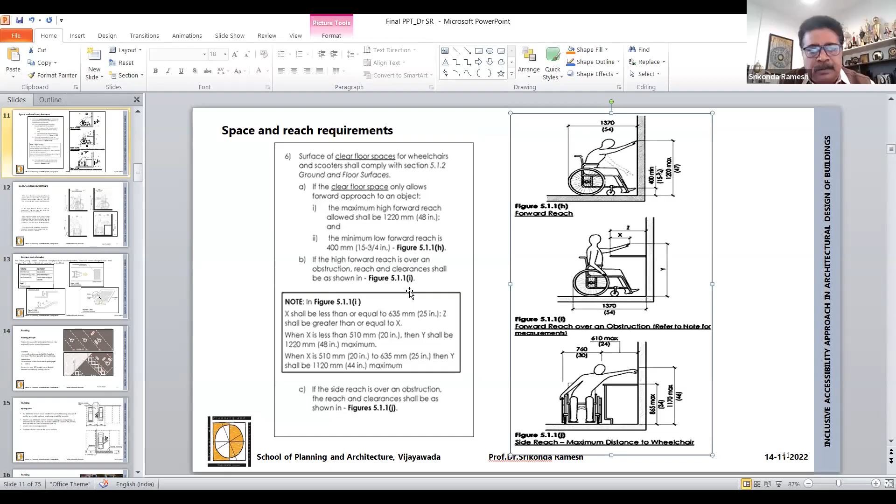Is it visible? Yes, sir.

Okay, good afternoon everyone. This is the first faculty development program organized by COA as well as SPA Vijayawada.

When you talk about architectural design, as you all know very well, since all participants must be architects, design is a discipline that focuses specifically on meeting the needs and demands of the user, creating functional living spaces, and aiming to combine technological and aesthetical parameters.

In the same way, it mixes as a creative process, and architecture is based on the creation and presentation of solutions at a technical level. By mixing both disciplines, architectural design seeks the value and formal qualities of the work through spatial experience.

This aspect of architectural design also involves other factors related to geometry, building physics, space evolution, ergonomics, and aesthetics, among so many other items, generally to get integrated into the design part. Therefore, the design is made up of many elements, processes, and phases.

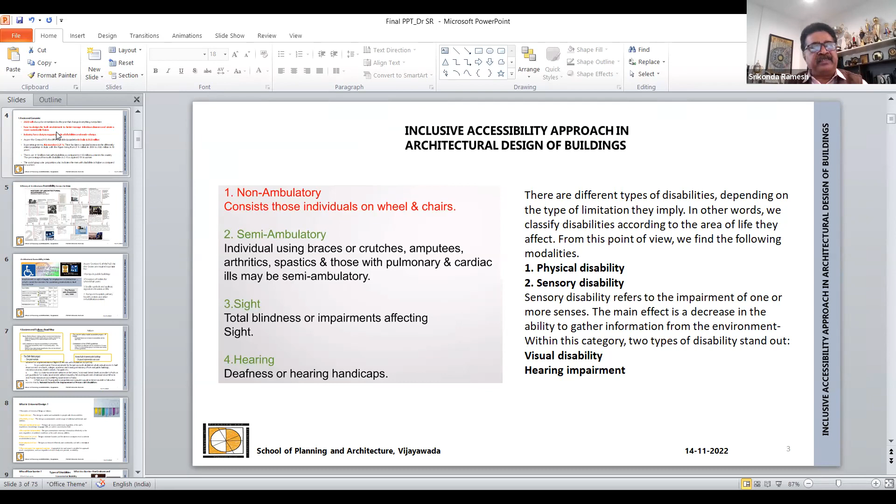Then sensory disability, what it means is the sensory disability refers to the impairment of one or more senses. The main effect is a decrease in the ability to gather information from the environment. This may be visual disability or hearing disability; these are two different things, the two difficulties they will be having.

Through sight, some percentage of information can be grabbed, but not fully. Sometimes partial visibility and full visibility they may not be having, so that kind of disability in terms of the visual generally will be having. Hearing also the same way - there may be partial and sometimes they may not be in a position to hear fully. These are the two things that come under this.

Then where it really matters to us - the non-ambulatory. This consists of those individuals on wheelchairs, and then semi-ambulatory individuals using walkers and crutches, and then cane users. All these are the semi-ambulatory.

From a sight point of view, there is total blindness and partial blindness where they may not be in a position to see. Hearing also sometimes has the same level of deafness or hearing handicaps. That's what we can say.

There are many ways disabilities can arise, but that is not the matter specifically for us. What exactly caused it is not the question here - there are people who are going along with us, and they are one among us. For such people, how can we bring about a universal design? That is the one which we have to look at.

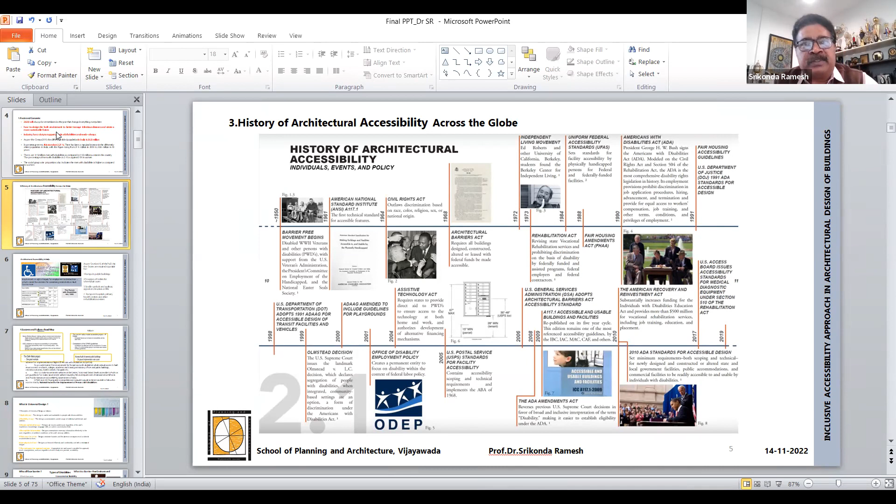Then it comes to the Indian government. The question arises: is there any Government of India initiative that exists for barrier-free design? Definitely, if you look at it, recognizing that persons with disability constitute valuable human resources for the country, and that a majority of such persons can lead a better quality of life if they are given equal opportunities - that's the first main item for any kind of act that we have.

The Persons with Disabilities Act of 1995 specifically indicates effective access to rehabilitation measures, particularly by the government, with a view to create an environment that provides such persons equal opportunities for protection of their rights and full participation in society. Accordingly, what they did was formulate and bring a national level policy.

That is the National Policy for Persons with Disabilities. The policy outlines specific measures and strategies, ensuring the protection of rights of PWDs, that is, physically challenged persons, to make them inclusive in society.

So those are the acts - there are a few more acts also. That is the Rights of Persons with Disabilities Act of 2016. Another one is the National Trust for the Welfare of Persons with Autism, Cerebral Palsy, Mental Retardation and Multiple Disabilities Act of 1999. And the Rehabilitation Council Act also, in 1992.

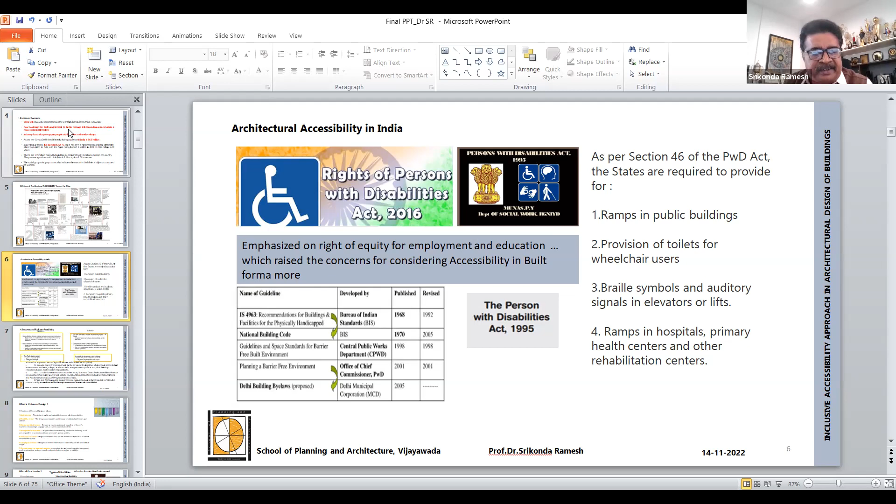So looking at successes and failures broadly, some successes include initiatives taken by different organizations. UGC and AICTE have also taken initiatives, publishing a book consisting of information on how we can incorporate these principles. Similarly, CPWD also made a comprehensive manual with guidelines for architects to follow those norms.

Other than that, national awards have also been given by the ministry. The ministry organizes this specifically to see how schools and hospitals will look into it, and they give national awards for the empowerment of persons with disabilities.

Every year on the International Day for Disabled Persons, 3rd December, the Department of Empowerment of Persons with Disabilities, Ministry of Social Justice and Empowerment, confers national awards for individuals, institutions, states, districts and other organizations for outstanding work done in the field, especially in the designing part, empowering persons with disabilities. Items which we're supposed to get integrated in barrier-free designs are also considered, and such great encouragement is given to them.

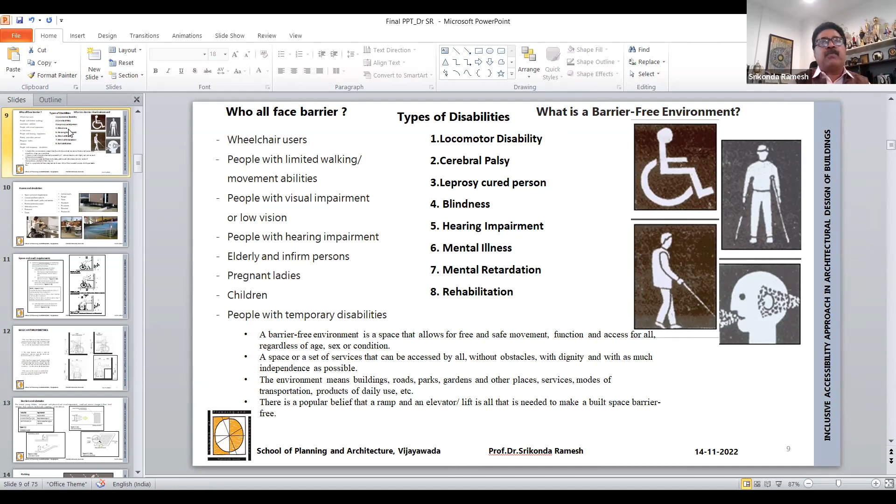An architect's responsibility is huge. First, you have to understand the challenges, whatever you are having. After understanding the challenges, you have to think about how the challenges can be addressed, whether for a normal person or a differently challenged one. For all of them, there is a challenge when it is placed to you.

It is not just about certain standards we are going to see now in this journey. Other than that, what is the best we can able to do? That's only the guideline to make it a minimum. What exactly is the maximum extent of the service we can provide, to make them more comfortable, give a more impressive environment, and bring in more inclusive kind of thought process and experience?

For instance, the particular items we are seeing are space and reach requirements, then ground and floor surfaces, accessible routes, paths and corridors, exterior pedestrian routes, vehicular access, entrances, doors, exterior routes, ramps, staircases, handrails, elevators, escalators—well, escalators not there, elevators—and then platforms, lifts, and all other items.

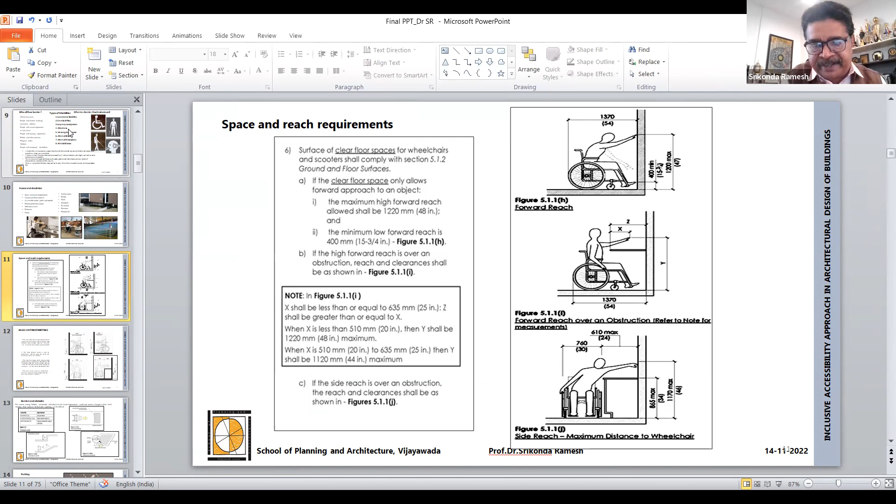So look at this: once you bend, once you move, these are the basic anthropometrics. Even height—generally we know very well the platform height we take is 750. Here it comes to 900 mm.

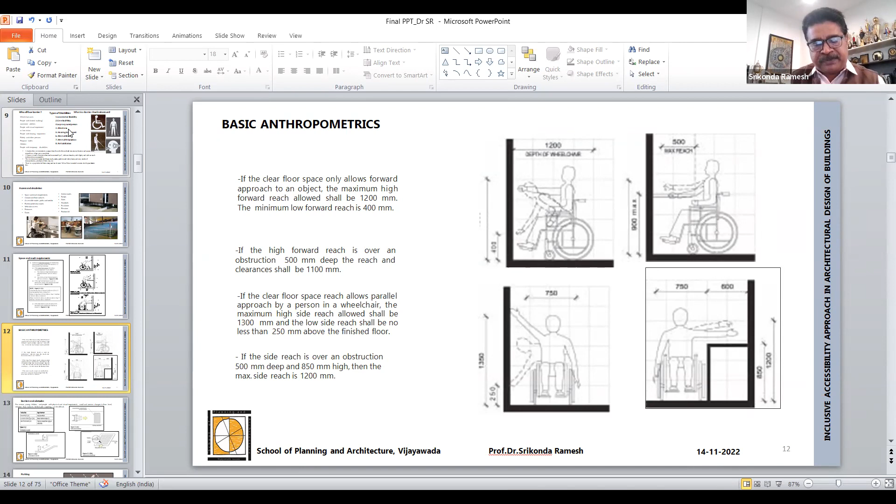That's what I am saying, the footrest generally will be like this everywhere. If you look at that footrest level, it's 250 and 150 level, away from the wheel, and there are some pedals where it will rest. Then high forward and overhead obstructions—we can see in what way you can avoid such obstructions and make the movement of the wheelchair proper.

We don't want to create a barrier with these sensitive and small items. If you really look at it, it can be designed more effectively for seniors, young children, and people with this kind of a challenge. Even the changeover spaces, like a slope, can be worked out appropriately.

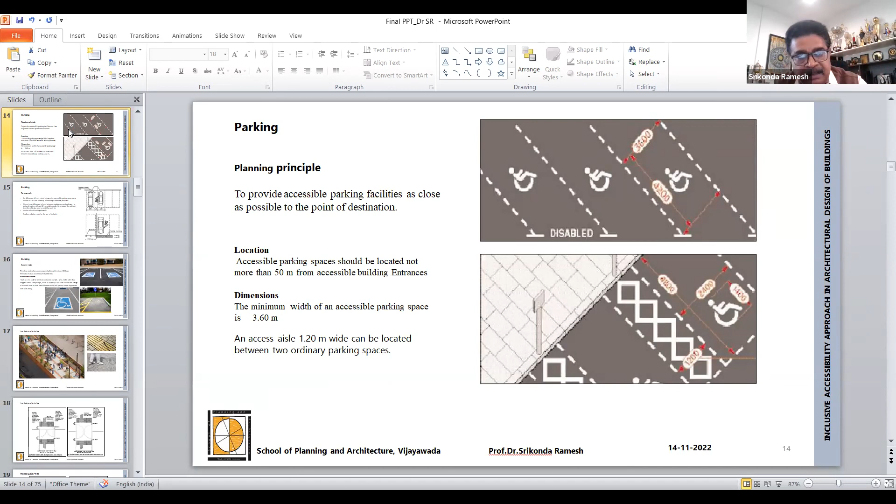First, you should be very close to the entrance lobby from where you get diverted to different spaces. Whenever you go for the parking, it's supposed to be 3,600. And parking lot to parking lot, once you take out the wheelchair area, you have to have 1,200. These are the minimum standards depending upon the ergonomics, anthropometrics, and the movement of the wheelchair being considered.

This also adds beauty to your entire design - the way you make the entire space accessible to everyone.

Then curb stones - once the door opens, once you keep a car parking bay, generally what we give is 2,500 to 5,000. But when you open the door for a wheelchair, one person wants to come and sit there, and another person has to assist - either motorized wheelchair, self-driven wheelchair, or person-assisted wheelchair. There are three different kinds of wheelchairs, and all three occupy the same space. From a space occupation point of view, it requires 1,200 minimum after opening the door.

Then you have to consider the same wheelchair doing a full turning - if it's a full 360 degree turning, you need 1,500. Otherwise, 1,200 is good enough. Then it can make a way to go to other spaces whatever you have designed.

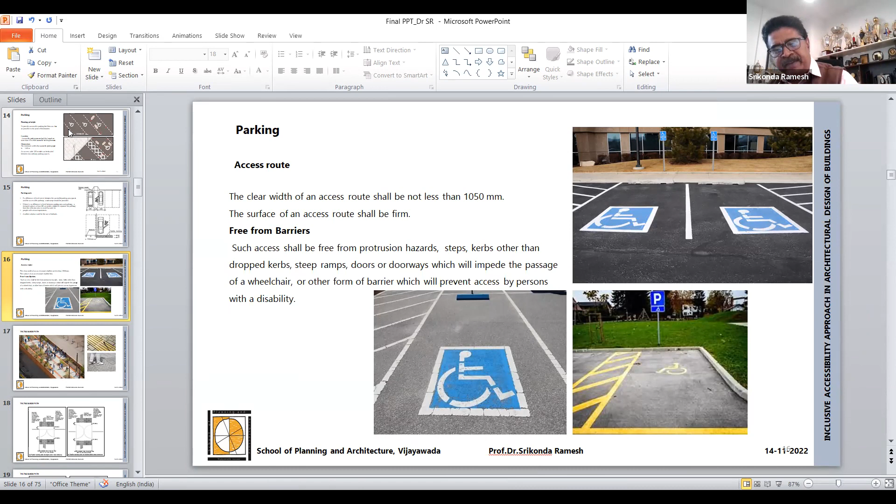So some symbols, access routes, free from barriers - I'll show certain examples and visuals so it gives you clarity, building on what we discussed in the earlier slides, in what way it can be done. The symbols make it clear this particular space is meant for that purpose, so you don't encroach or occupy or create a problem for free movement of wheelchairs or persons requiring that kind of access. So one way you can see these are the things which are tactiles, guided paths.

Tactiles - further slides can give you more details. One is the leading, direction tiles. Another one is the warning tiles. Another is the hazardous warning.

Depending upon the depth and width of the buttons, whatever we normally put on the surfaces where he is standing, you can see that's a different type of texture. There are two ways - when moving with the stick, if you put it down, he gets a different type of feel. That feeling is good enough - it gives a message to him. It's a place where he cannot go beyond that, or there may be a diversion of his path, or he has to stay back and move his stick again.

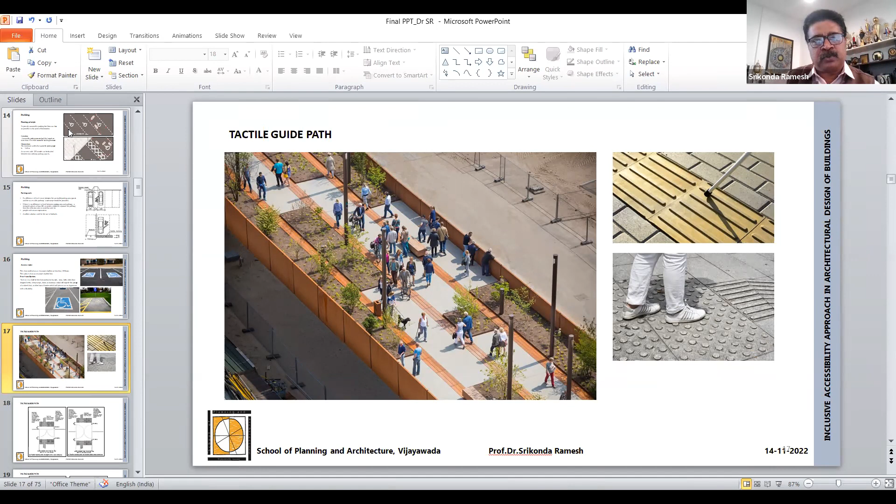So with direction tiles, the moment he touches it, he proceeds towards that particular direction. So you can see tactiles, the positioning of the tiles - one is direction, and the other gives information through the movement of button tiles.

That gives the space from where you will be in a position to enter. There you have got the door opening. So stay back and then you lead further, using direction tiles, the tiles which give the direction, because that way it's lengthier.

These recessed kind of surfaces, when I show the cross section, it will be much more clear to you. So whenever there are swing doors, normal doors, and movement and access from one place to another.

Even in public spaces, any kind of shopping mall, or even in a residential building, wherever you wanted to show the access, you can provide this in schools, hospitals, and all other places. These tactile tiles can really help visually impaired persons, guiding them where to go, where to stop, where to take a diversion, where to move, and which places are hazardous and not supposed to be entered.

These are the direction tiles. Depending upon the kind of texture and surfaces, even visually if they are not very strong, they have only short visibility. Color can also really help them understand, if they are partially disabled in terms of vision.

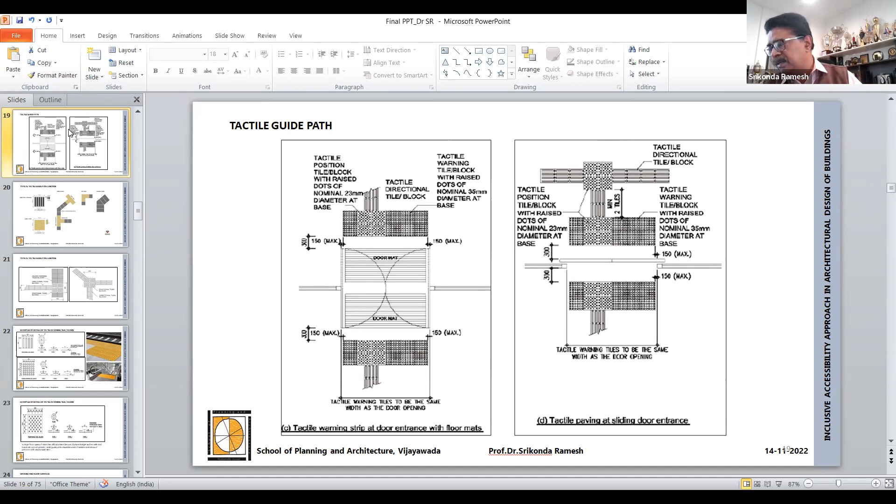So we can see these direction and advance tiles are the leading tiles, how they look. And there are stop or dangerous tiles, which give the signal to you to stay back, so that until you get the direction, until you touch or feel the direction tile, you are not in a position to proceed.

Such information can be passed, and this kind of design can be integrated into movement areas. You can see that hazardous tiles have a higher diameter, while normal dangerous tiles' diameter may not be as much. There are positioning tiles as well.

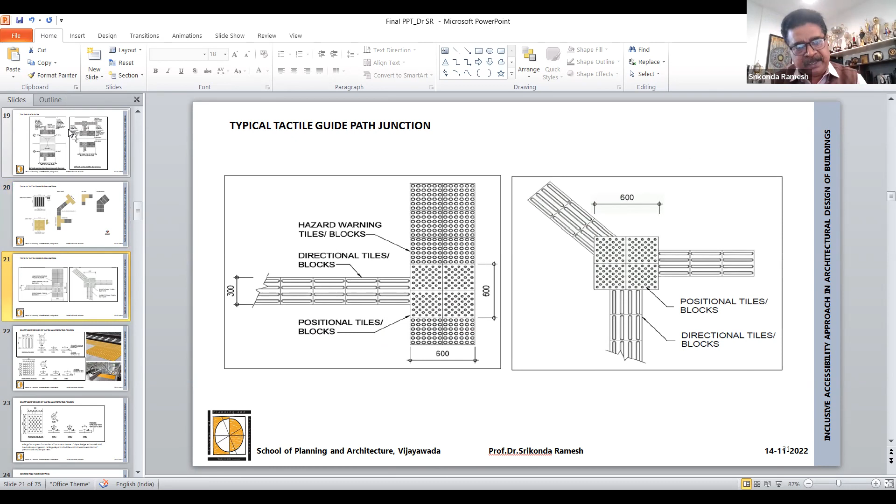This can be seen in a little more detail here, with a bit more clarity than in earlier slides. So you can see how the hazardous tiles, warning tiles, and direction tiles differ in dimensions and other aspects.

These are the things available in the market. Only if you can understand those tiles can you suggest the path and other design elements accordingly. The designing is our part, in what way it can be designed, angular, or direction oriented.

Or the places where you wanted to stop them, specifically where there are zebra crossings and footpaths close to the zebra crossing. There's a different type of hazardous warning tiles or block tiles we design there, or otherwise just next to it.

Even in the footpath, as you know, there are three different zones: one is the furniture zone, another is the actual movement zone, and the front side near the compound wall type zone. These divide the footpath.

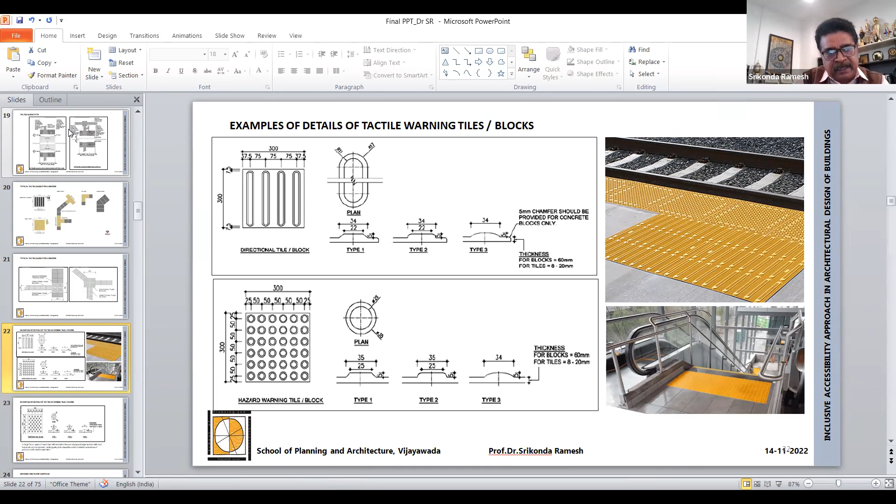Wherever there is a movement zone, this kind of tiles can be integrated, so that the movement gives very smooth access for them to reach their destinations with proper guiding and hazardous warning tiles, if done appropriately.

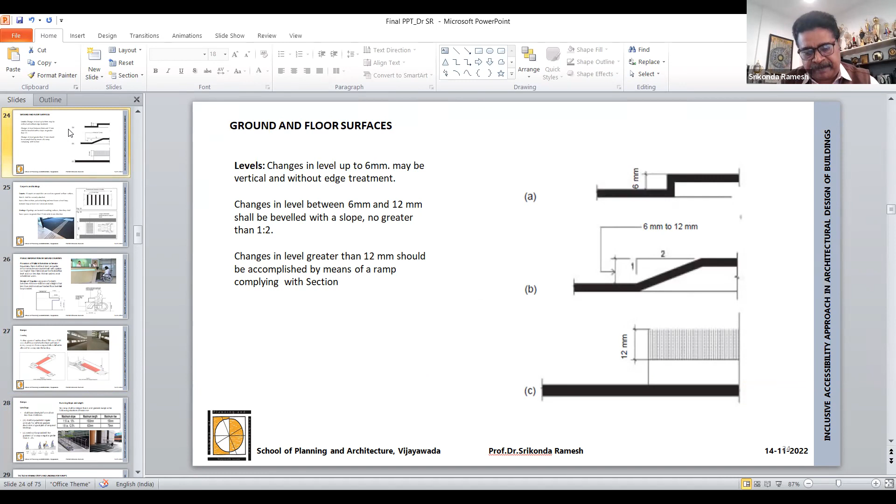Some more details, like positional tiles, where the diameter and spacing vary. The ground and floor surfaces, as I mentioned, only 6mm to 12mm can be adjusted or digested, provided you account for wheels, cane users, or semi-ambulatory and ambulatory persons.

You can see when using carpet, how the carpets and gratings can be integrated. Even the carpet should be at the same level, so that it maintains a universal standard.

There should be a language. This is a language, and if we have it, people can easily understand it. But this language, only in how you put it, can take them and lead them to spaces as others are really using and experiencing. To that extent, to the maximum extent, we can achieve this by integrating the same thing in proper design.

I got only a few minutes, so I'll try to make you understand overall about this - in what way wheelchairs work in case of a reception or information counter, the design, the desk where they can operate and write and collect information.

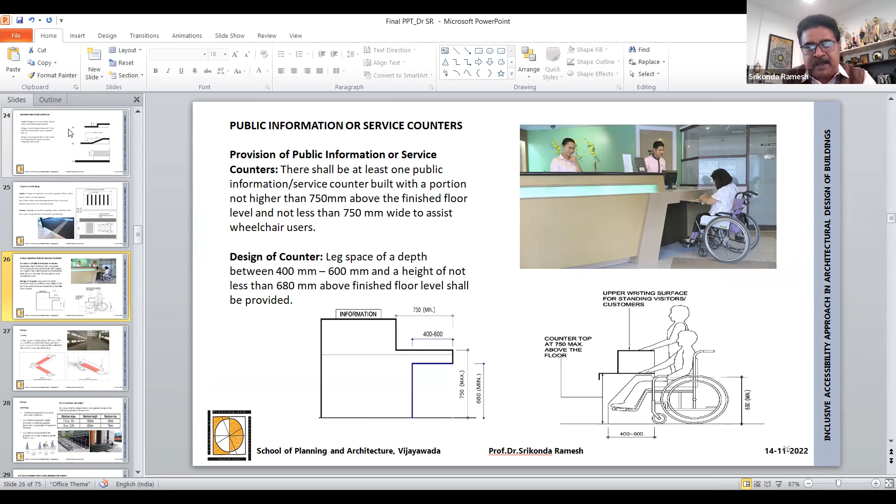It's supposed to be like 750, and the bottom level not less than 680, so that even including his knees, without any problem, it can go inside. They can sit comfortably and operate this kind of furniture design when it comes to the interiors.

For ramps, you should remember 1,500 is the minimum. It should not be less than that. You even have to introduce railings at 900 level, where cane users can make use of it.

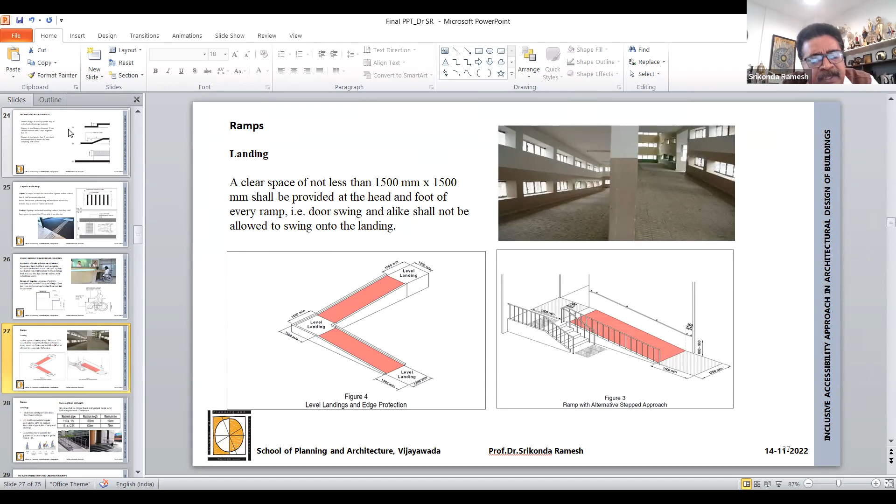There are different slopes, starting from 1:10, 1:12, 1:16, even 1:20. All these things matter to us.

The maximum slope 1:10 means, if you say 150 mm height, it will be 1500 mm length. Similarly, if it's 1:8, that's 12.5% slope - if 75 mm is the maximum height, it can go for a length of 600 mm. These standards have been converted and shown lengthwise, how the length is supposed to be in terms of its height.

Easily you can see what 1:12 gradient means - this is how we work it out. In most ramps, they can be integrated with tactile warning strips, as well as landings, where you'll be in a position to allow wheelchairs to go comfortably without obstructions and not exceed the speed limit.

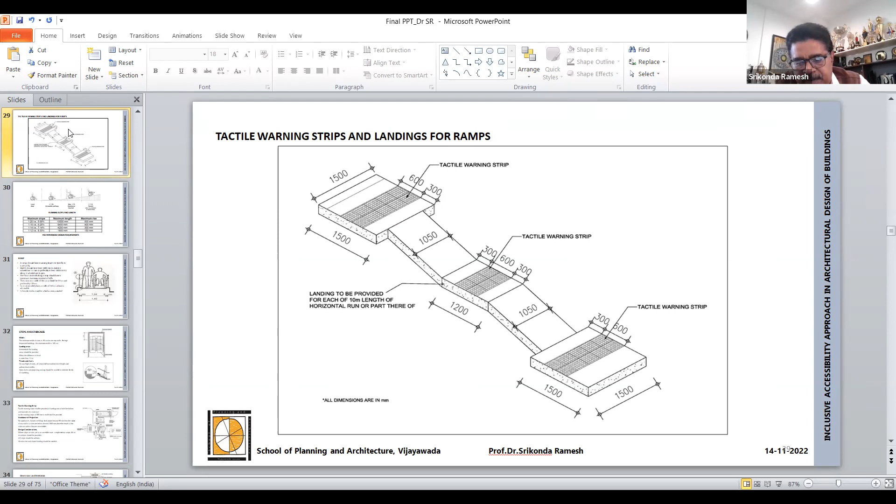The maximum length 1:20 - generally 1:20 or 1:16 is ideal. In hospitals also, we see maximum of 1:16, but not 1:12 or 1:14. Mostly what we see is 6,400 length, with only 400 as the rise.

This way we can see the ideal level, accessible pathway, assistance required, and hazardous crossing points. So an accessible pathway at 1:20 is more accessible, but maximum assistance is required if you go up to the maximum of 1:10 ratio. Less than 1:10 is not at all advisable.

These standards are available, but to make you understand, sometimes you yourself can design taking certain things into consideration. What the architect requires is the information, the data, and the innovation that has been made. If you gather all these items and have them in your mind, you'll easily be able to put them into your design and see how the design works.

Because you are the visionary, you are going to design any campus, office building, residence, or any kind of commercial space - different types of people are going to use it. Irrespective of limitations, it should be accessible, it should be workable to everyone.

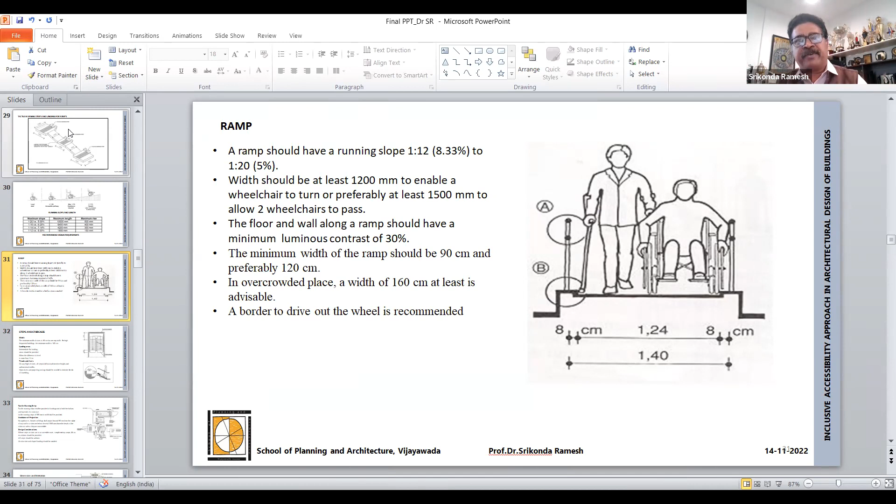For architects, you have to give a minimum of 1500mm, irrespective of the occupancy and the kind of load you are designing for, whether it is a double loaded corridor or single loaded corridor. But for a proper double loaded corridor, it could be 2400, depending upon the occupancy. Once you want to provide a barrier-free environment and make it comfortable for wheelchair and cane users, you must maintain a minimum of 1500.

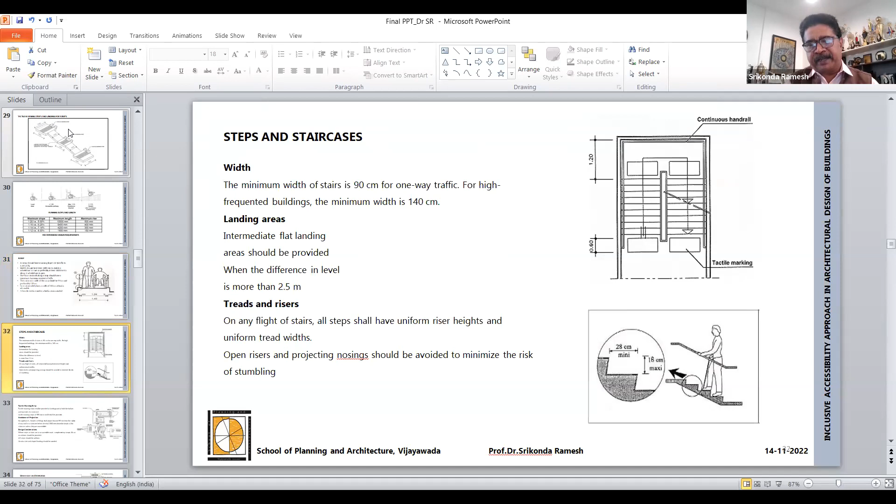At places where there is a turning point or starting point, you need warning tiles, like the button tactiles we showed, which give a warning so they can understand something - either a diversion in the route, an obstruction, a mid-landing, or a landing. There's an immediate change, so you have to be careful. That's the signal it gives them.

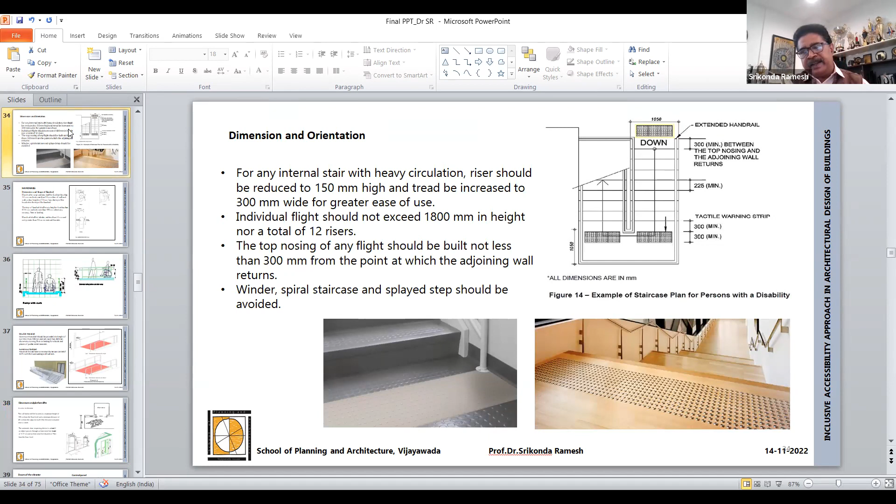See how it looks - before steps, this is how it has to be given, so that they can lead to the corner and hold on, even with partial visibility. They can hold the railing and move towards the direction of their work. Of course, you can see handrails of a different nature.

This is much better to use - you can embed it in the wall or make it a straight running rail. The maximum clearance from the wall should be 50mm. It should be fixed, and 30 to 50 is good enough, but 50 is always better.

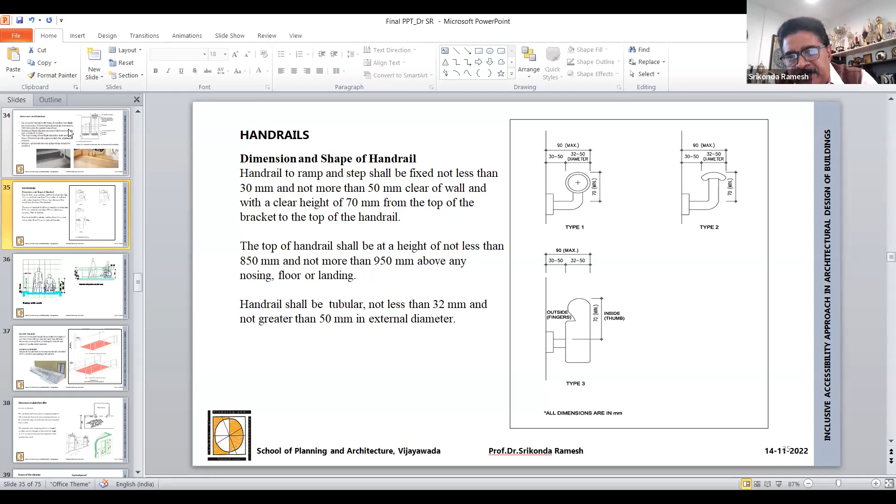For slopes with a person walking, you can see the height of the railing can go up to 2 feet 6 inches or 30 inches, that is 750mm. Some places use other rail heights - 750 is for children, and 900 is even for elders to make use of it.

Where there are steps on one side, you can introduce railings on ramps on the other side in such a way that all persons can be accessible through this design.

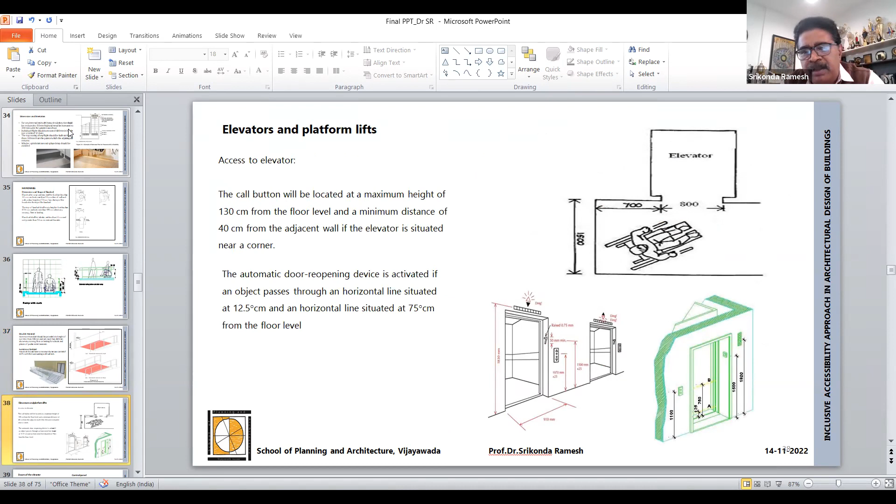Elevators and platforms also give the same accessible feeling. A minimum of 800mm is the width required for the elevator so that a wheelchair can move in with ease. You can see in the plan how the doors of the elevator are supposed to be - minimum or more than 800 is better.

The control positions should be accessible to the hand of a person sitting, so the length you have to fix from the finished floor level to the usable level is up to 900mm.

Doors of this nature are always better. Here you can see how the doors are supposed to get opened, and once open, the bottom floor clearance has also been mentioned very critically.

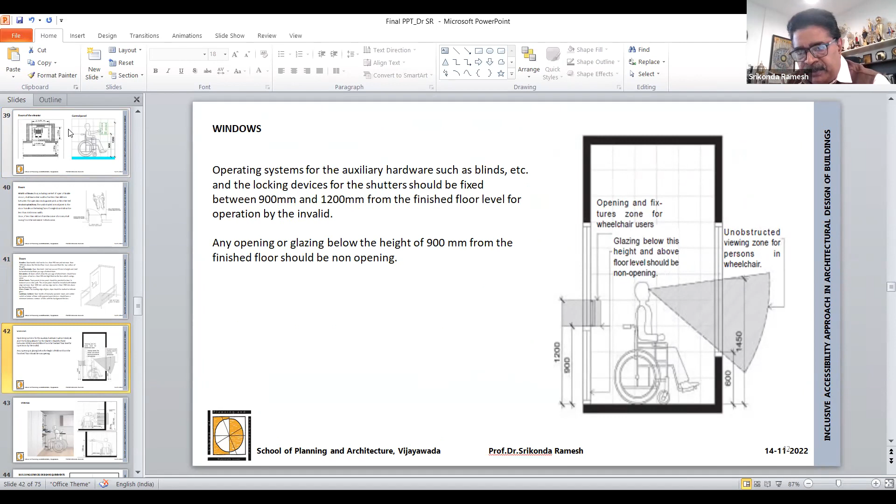For window openings, 1200, 900 - you can see the openings and fixtures specifically for wheelchair users, showing how it's supposed to be.

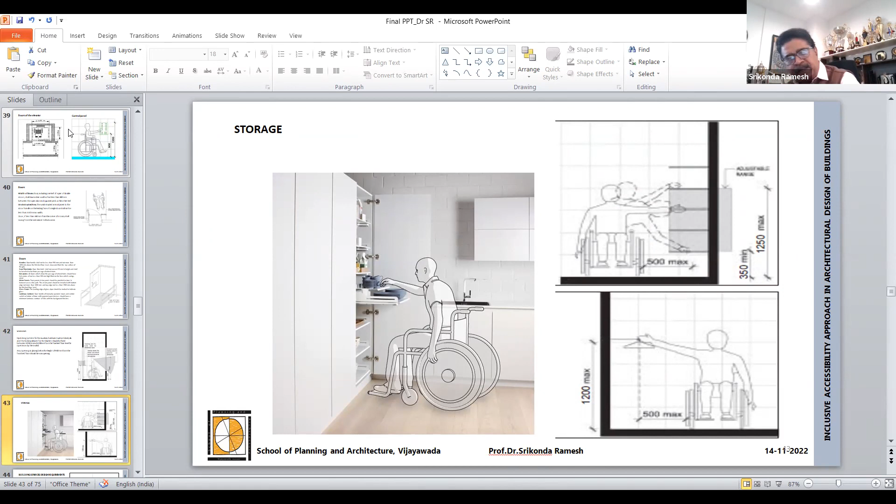For storage, once there's a storage unit, leg movement or leg room may not be available. If you provide a recessed leg room, this isn't a problem. If you're not able to provide recessed leg room, you need pull-out systems so that the legs can go in and the hand can spread, making items accessible to the person.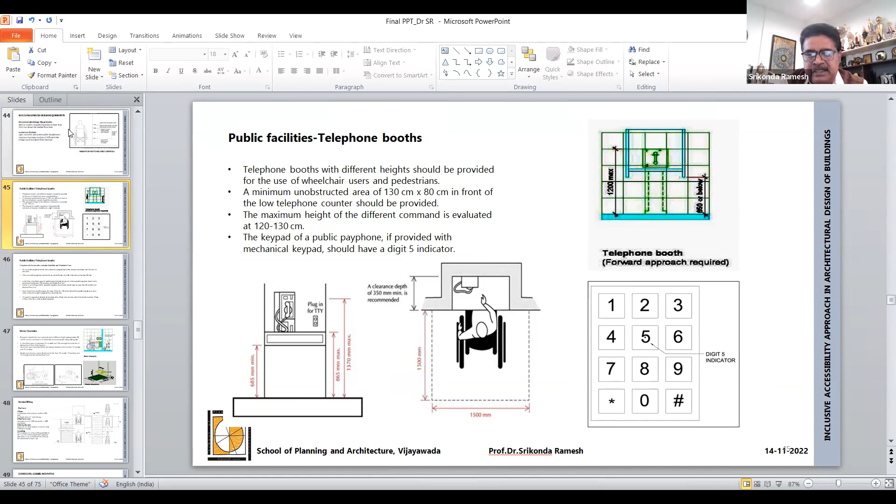Public facilities and telephone booths should essentially be designed like this, and should not make the person stick out from the particular obstruction. So with recessed items, there is a particular dimension of 350 mm, which if maintained, allows a person to easily press the buttons and access public telephones without difficulty.

Now this is one important thing regarding wash basins, and then there is the leg room, which is very much important. Legs cannot go inside. If it goes inside, this is how it's supposed to be. It should not get stuck and obstruct general movement.

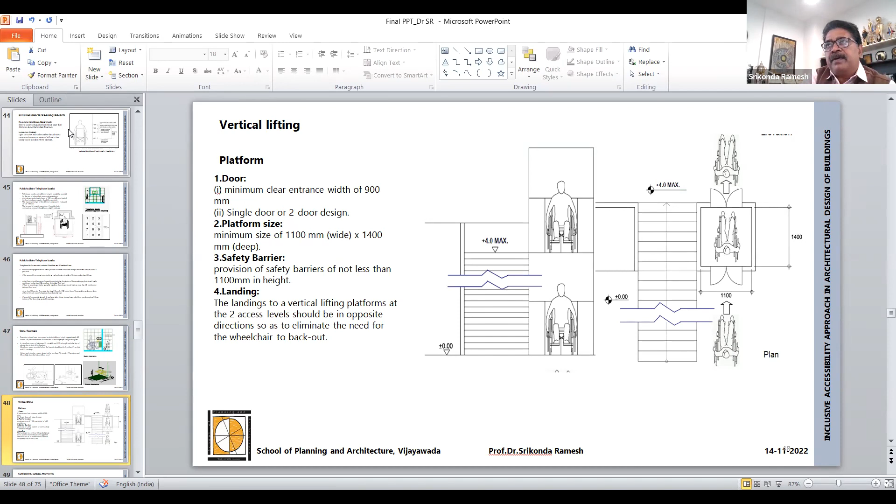Platforms, doors, sizes, safety barriers, and landings, if you see. Broadly, I'm showing you certain things that are there in the standards, as in CPWD standards, AICTE standards for universities and colleges, National Building Code standards, and the Universal Building Code also. There too we have the standard. Go through it, and some items I am showing you, depending upon conditions and situations, can be accordingly integrated into your overall design.

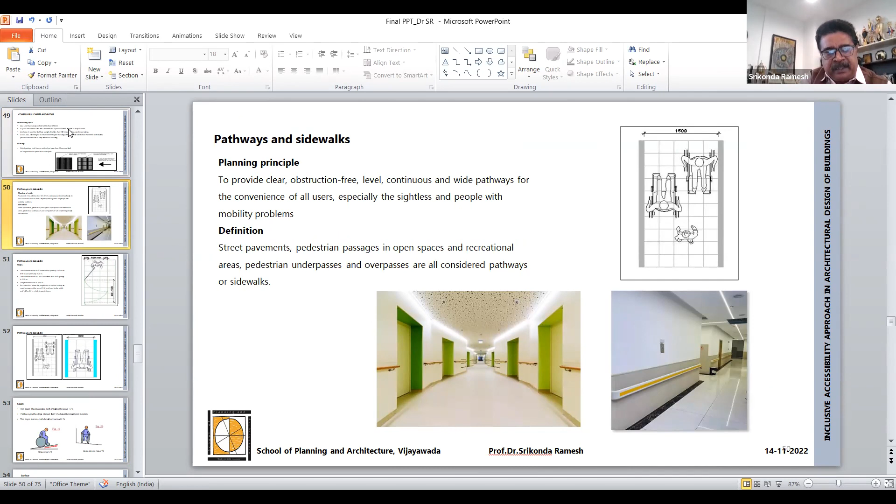So pathways, sidewalks, and all the things related to color, texture, including guiding lines, everything can help a person reach wherever they want, where you really take the design and integrate it into the overall design. That's what matters.

So the general movement of his stick gives a lot of information so that he can assess and access different areas - the diameter and length of the stick, and how the pathway should be, preferably 1200 mm.

The minimum width for two-way wheelchair traffic passages, as I said, is 1500 mm. The preferable width is 1800 mm, which is best if you can go for it. So you can see how 1500 mm allows two wheelchairs to cross each other.

What is the appropriate slope? 5% slope and 2% slope. A slope of this nature is always dangerous. The slope across the path should not exceed 2%. Otherwise, it is very dangerous and creates more discomfort.

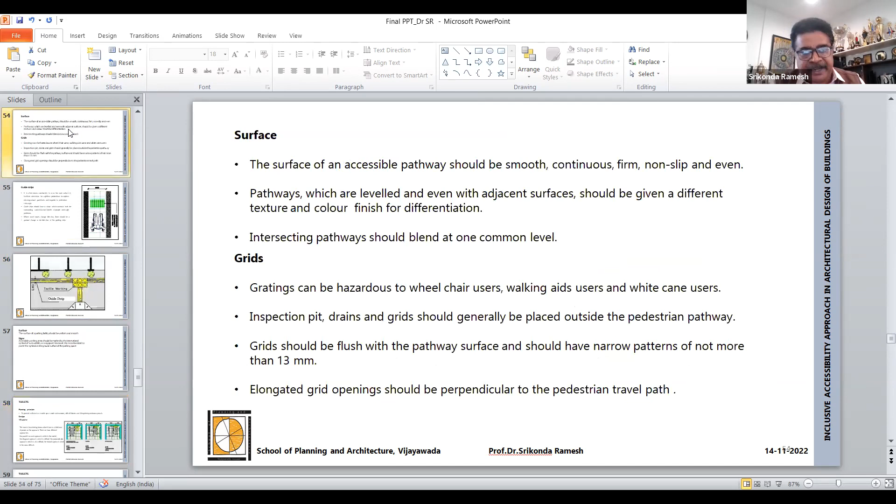So in case of footpaths, wherever you want to have zebra crossings, you will use button tiles, tactile marking, and guiding strips. It stops there when the footpath level is 150 and the normal road level is plus or minus 0. You work out the slope where it joins the road level, then you have to use hazardous tiles and danger tiles, where they can stop and negotiate which way they have to go.

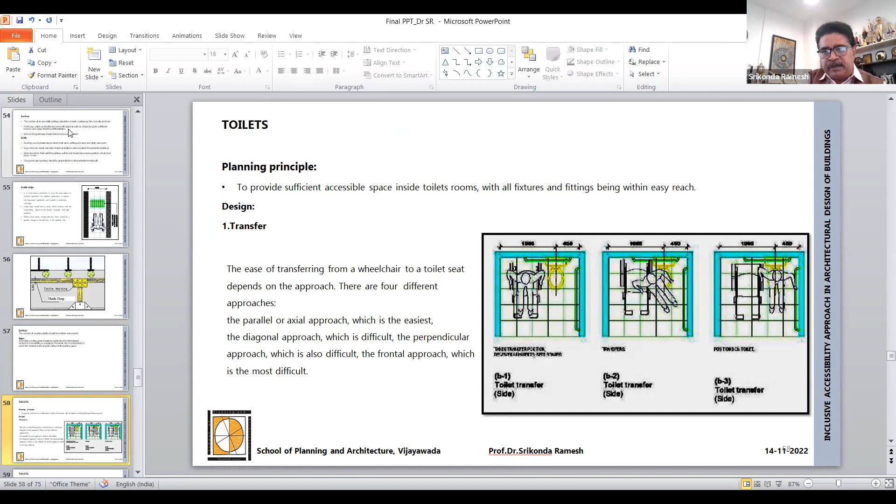Toilets are one important thing, a prime requirement in all places. When the wheelchair user shifts to the WC, one can think through this, and accordingly the width has to be worked out. You can see in case of a wash basin, the movement becomes tough. If it is 1500 mm diameter, for a full length turn, D comes to 1.5 meters. If there's another element like a wash basin present, then it cannot work.

In case a wash basin is provided properly, there should not be a bottom trap obstructing it - the drain pipe should go straight, concealed within the wall, so the wash basin doesn't create a problem. If there is a bottom trap that hits the legs, then the 1500 mm diameter cannot properly allow a full round turn in the toilet.

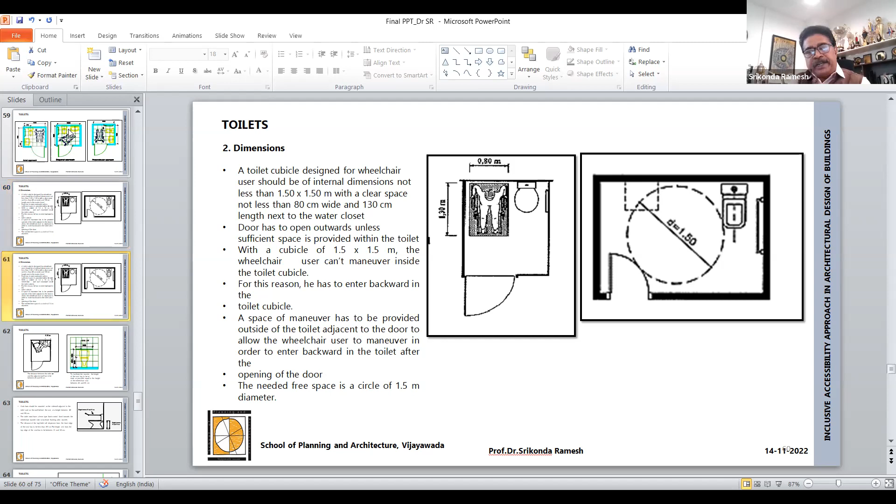See how the shift works - I've already shown this to you, but I'm showing it a second time since it's important. Only considering the WC, this is how the dimensions can be seen - 1300, and the height of the handrail, because he has to hold the handrail either at the back side or the side. Then he can shift from the wheelchair to the WC. These are very important things that should be taken care of.

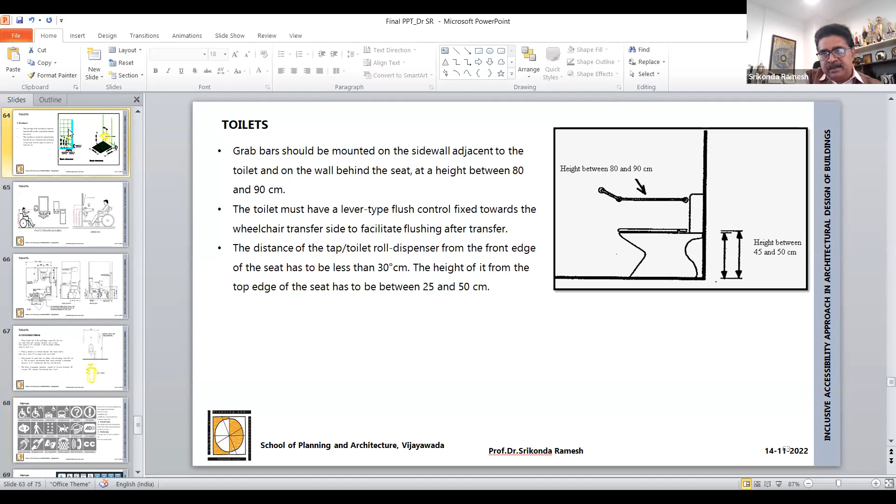Otherwise, the design you have made is not going to be useful to them. Side rails for the toilets where they can hold, and for the wash basin, the angles we fix, and the bottom trap, in what way you have to design it. You have to be very critical while designing, thinking in what way this should not obstruct us. You can see what I am showing you, the bottom trap.

Sometimes, straight from the top, even without the P trap, you can take a straight trap. The mirror also should be inclined - it may be more preferable. If it is straight, some ceiling or certain things may get reflected. If there is a slight angle towards his face side, normal to the line of visual axis, it may give full clarity about the mirror to him.

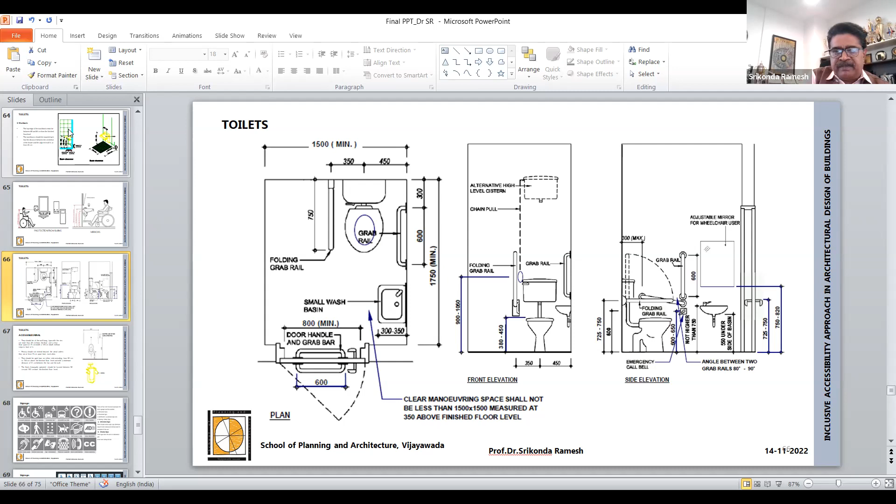All things put together, you can see the railing of the door, the handrail, and then internal items, all items. Even here it has been given the cistern tank and everything - it's a very old design. Nowadays there are flushing tanks, and wall-mounted things are coming too. That's more preferable than floor mounted.

There are certain symbols - these are urinals where cane users and other users can be made more effective, so you can see the side rails where they can leave the canes and hold it. Even they can use these kinds of urinals in a proper way.

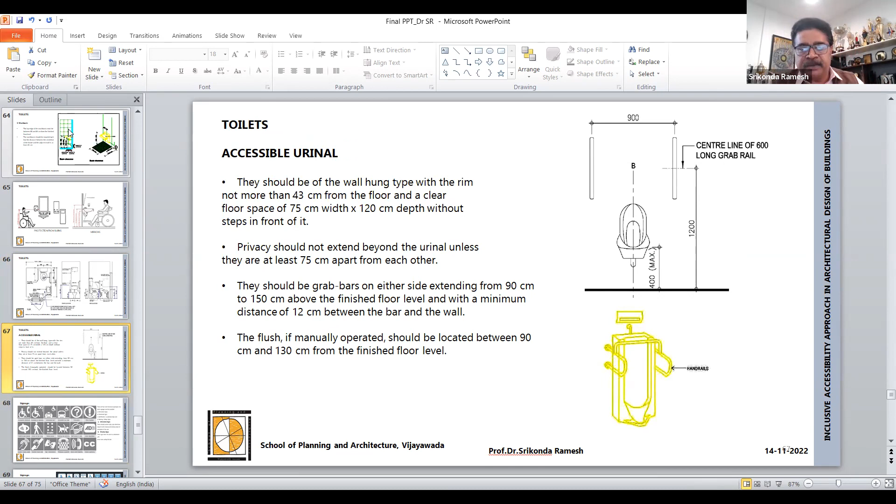Everything as an architect works for what? He works for ease, to create comfort to everyone. That matters a lot - make comfort to everyone, understanding the abilities of a particular person. Abilities and disabilities - whatever I can put in quotations, abilities - a person's needs, how we can make a person comfortable, whether visually impaired, partially visually impaired, or any other physical or other impairment. Understand them properly, and our duty is to do the best service to them.

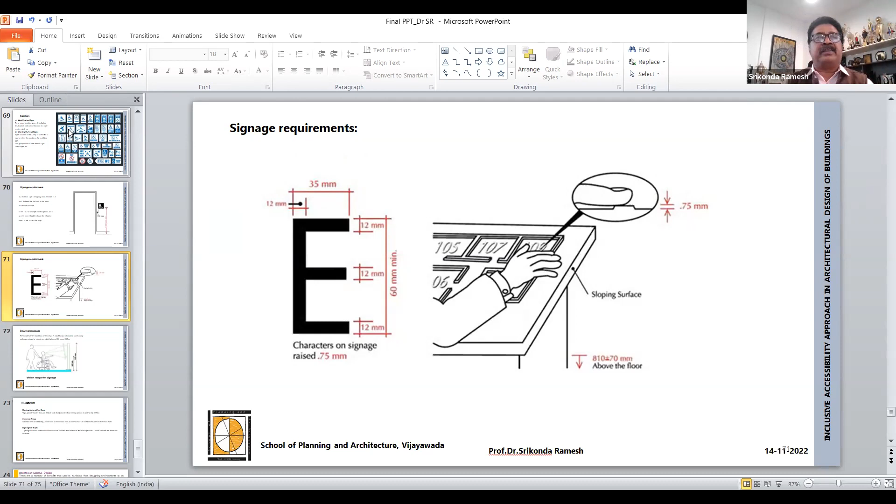Normal eye level, even up to a height of 1500, without inclination, you are still accessible and in a position to see what exactly they want you to see. But if you are sitting in a place and keep moving, in what way are you in a position to receive the information properly?

And finally, the benefits of inclusive design, what it is. There are a number of benefits that can be achieved by designing for all these inclusive conditions.

First, understand the pre-design considerations. Systematically, you understand and try to create a concept. Through that concept, you try to develop a design development, and of course construction details and documents, and start experiencing first initially by your own eyes the design, however useful, however inclusive, how it has made everyone feel comfortable and accessible.

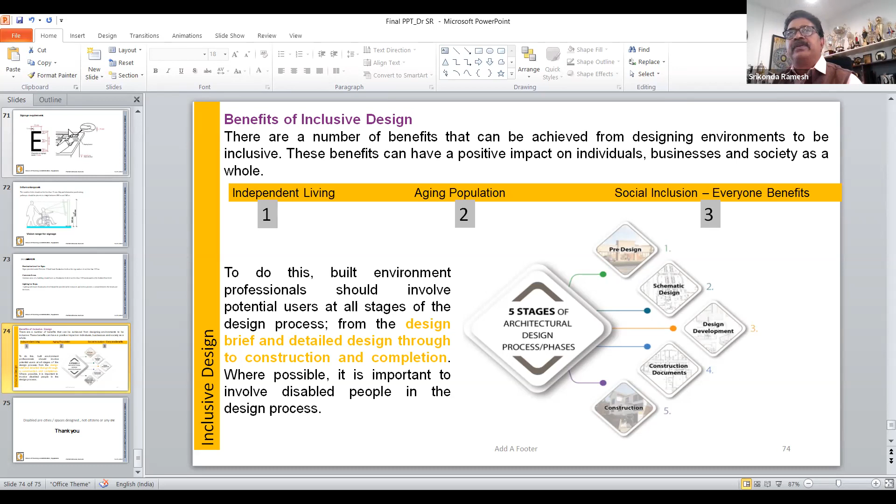Independent living and aging population, and social inclusion, both are equally important to us, so that we are in a position to address these challenges that we generally have. Only then can we say our design is, first you satisfy yourself whether the design you have given is inclusive or not. If it is inclusive, you are successful. That is how we have to look at it.

Then finally, thank you to everyone.

Are disabled cities or spaces designed? Spaces are disabled, not the citizens and the persons. If a space is not really addressing it, that space is disabled. The city is disabled, but not the persons. So we have to live up to the expectations of everyone, and government policies and all other things are really making it happen. We have to work with them and ensure that every environment we design and generate is going to be useful to everyone with an inclusive approach.

Thank you. Am I taking time, or is it within time I covered? No, sir, it is within time.

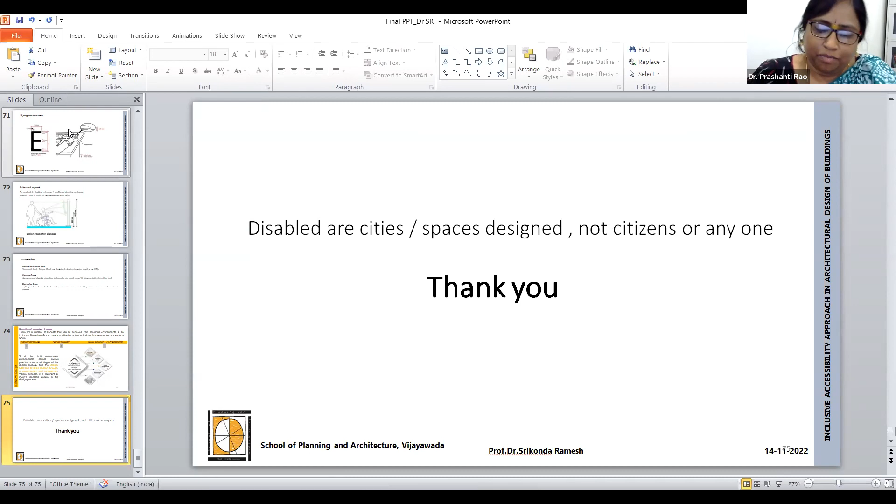I would like to thank you, sir, for your detailed and elaborative study shown to us about the importance of anthropometry and ergonomics for better experiences in bringing inclusive accessibility within the built forms. I hope it was like 75 slides and we were thinking, but you have actually completed all. Thank you so much, sir.

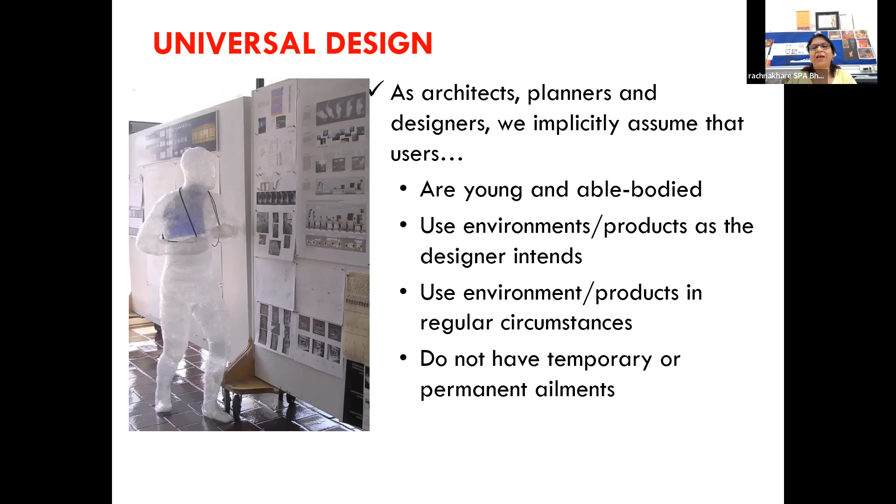We all believe the person we are referring to all the time in the standards, in the Neufert, in the time-savers, is able-bodied — he was able-bodied when I was studying architecture, and now even when your students are studying architecture, he's able-bodied. He doesn't have diabetes, he doesn't have blood sugar, he is a person who is immortal and free of any disabilities. So when we do this, we are simplifying that all users are average users.

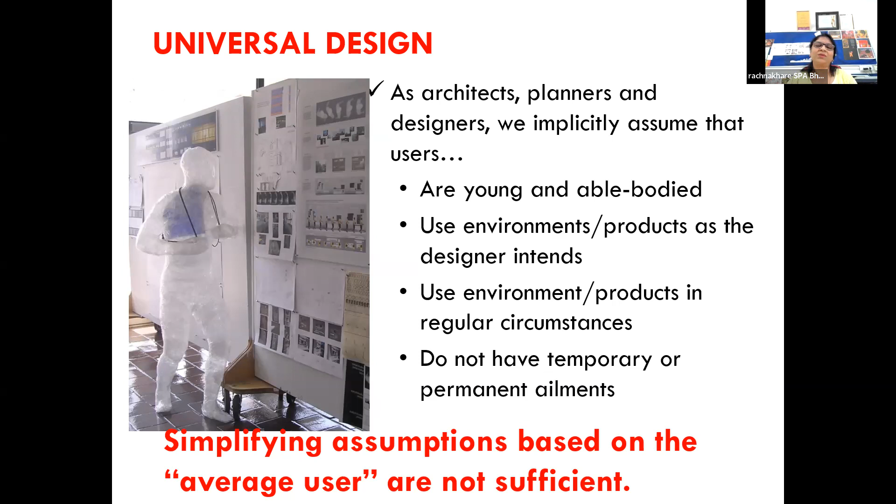They have average conditions. But is it really right to simplify with this assumption that an average body is like an average body for everyone? And if we see different...

...components of our body, right from sight to brain to ears, our hearing, our balance, our dexterity, our arms, our bones, our hands, our legs, our bending, our walking — all these things get affected in our lifetime, even when we are young, when a woman is pregnant, or when we have any temporary bone fracture, or when we start using our specs, or when we are using our mobiles, walking in traffic, or when we become old. There's no one in this world who will remain perfect or fit into the condition or definition of the average user, as we always refer to when designing a built environment.

So that is what brings the concept of universal design. Universal design says that it's a design of products and environments to be usable by all people. All people here are not the people by numbers, but all people by age, ability, size, conditions, and different kinds of permanent and temporary ailments which they may have. So they say that it is to be usable by all people.

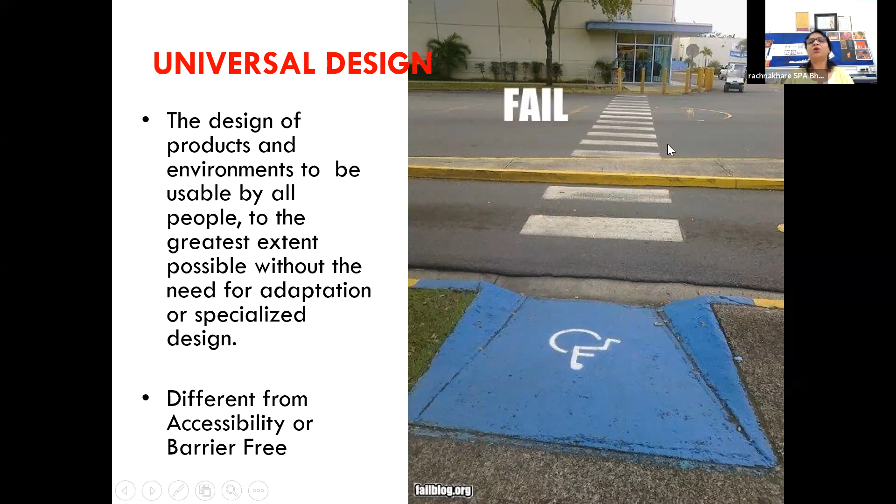So that is why it is different from accessibility and barrier-free. In accessibility, we talk about different kinds of guidelines - you must have seen harmonized guidelines, CPWD guidelines, and several guidelines across the globe which people refer to. We follow and comply to those guidelines which are meant for people with disabilities.

And then, unless and until we comply, unless there is enough compliance, maps don't get passed from the authorities through which you can implement those designs. So this is accessibility, where you are talking about the guidelines and implementation of the guidelines. This is very important.

Usually when we talk about universal design, and the places and context from where the definition of universal design came, accessibility was already there. In barrier-free, we are thinking about the barriers. We are not thinking about the people, right? We are thinking about the barriers - hello, all okay? Please unmute yourself. Yeah, so in barrier-free we are talking about barriers, as the name suggests - you are thinking about all the barriers and eliminating them.

But in universal design, you are thinking about the people. In adaptive design, you are making adaptations - you are thinking about people, but thinking about making adaptations to already existing designs, how to change it to make it friendly for people with a disability. In assistive design, you are thinking about assistive technologies like a wheelchair.

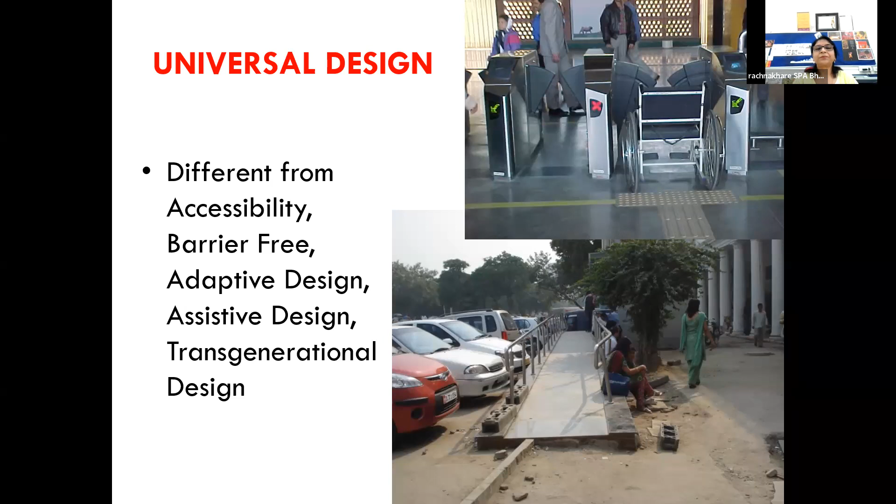So here you can see what happens in case we are not thinking about universal design. This is another example where you are not thinking about labels of disability, like this wheelchair sign, but you're thinking about long, tall, short, wheelchair users, children, and everyone. In the design itself you are considering all of them just by altering the heights, making it useful for everyone. So it's a universal design, it's not a specialized design approach, but still it encompasses all approaches like accessibility, barrier-free - all these things are there. But when you are doing universal design, we assume you have done all those things, but done it in a beautiful way without labeling it, without making any adaptations, taking care of everyone whosoever is going to use it.

It doesn't talk about, it is against homogenization through uniformity. It may appear, once it happened with us in one program, one person thought that universal design is one design which is taking care of everyone. So it is not true. It is against homogenization through uniformity. One single design isn't supposed to, it will not take care of everyone. But one design is taking care of needs of everyone.

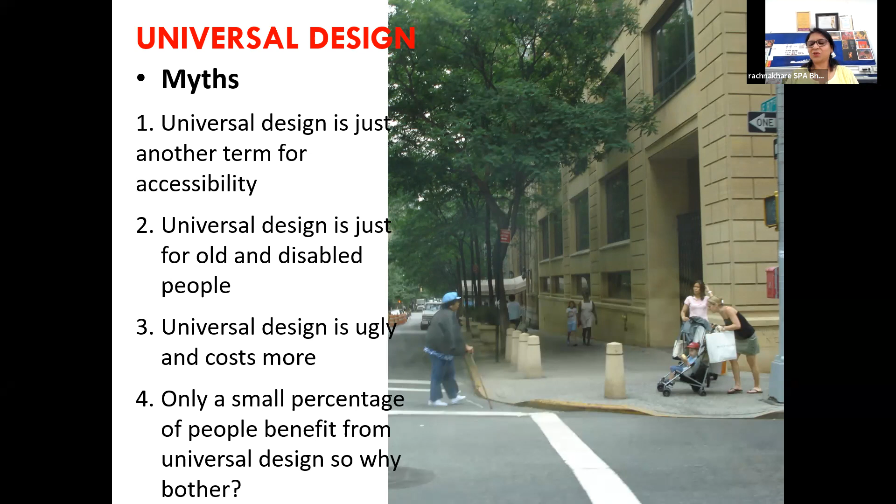For our future selves, all of us are going to use designs in case they are being designed universally. There are so many architects, so many masters, those who have done the design, but they could not visit their own designs, own buildings when they became old. And the same will happen with all of us, all of our students also, because none of us can defy age.

Universal design is not just those guidelines which can be done in product, or those principles which can be done in product, but it is applicable in every scale, right from planning cities to landscape, architecture, interior, to instruction.

So in case some of the people have any different requirements, they can use these washrooms. There can be even washrooms like restrooms for individuals, those who are not neurotypical. So even that can be a way to show that yes, we acknowledge that people are different, and then we are providing facilities which are absolutely not being labeled, not being stigmatized, but then everybody is using it with the same pride.

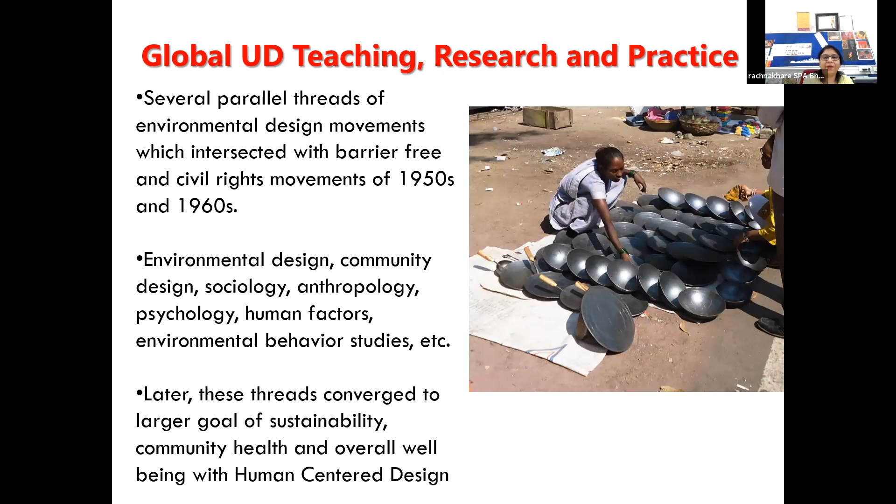Now, today, universal design concept goes beyond usability to access, promotion of health and wellness, and it talks about promotion of social participation of all threads. So all those concepts where we talked about function in the building, and then wellness, health, well-being, all these things are environmental design, environmental psychology, sociology, anthropology, all these parallel threads are converging into a larger goal of sustainability, community health, and overall well-being, which we say is human-centered design.

Which is a process where people are, as I was saying, in the center of the design process, which can be applied from the city level to handheld products, where you are thinking about individuals, their well-being, their physical well-being, emotional well-being, psychological well-being, and then you are making it human-centered. So the whole concept of accessibility, universal design, all those threads converge into human-centered design.

Right, it's not moving here.

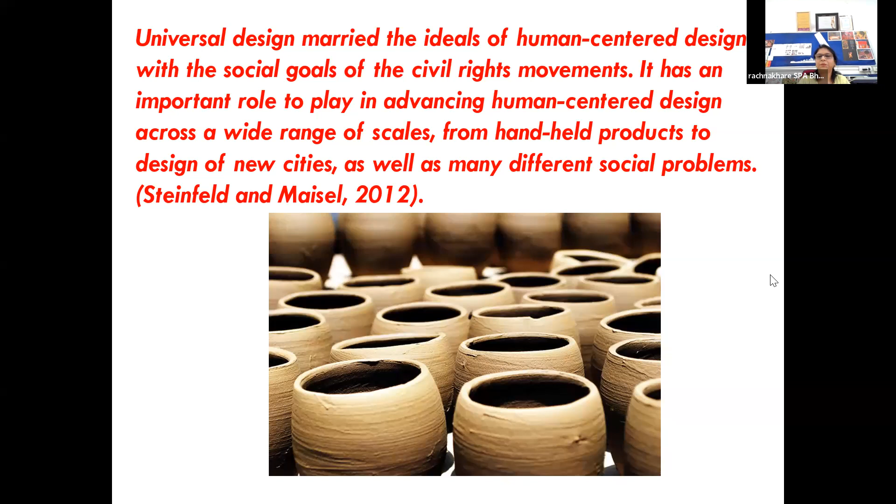In India, universal design practice and education became a worldwide movement, but demonstrated limited acceptance in India. We had our first act, the PWD Act, in 1995. But it had only one article which talked about accessibility in infrastructure. Gradually we had several other acts, and we also have UNCRPD and different guidelines which came over the period of time.

But then we always have seen universal design as a set of codes and guidelines. We also have taught it like a set of codes and guidelines, but there are only few efforts in universal design education and research. These guidelines are being seen as few sheets which people make where you have the wheelchair user and different range and reach, which is being demonstrated through design.

And these are all based on a Western model where you have these guidelines, but you are not thinking about the Indian context. You are talking about curb cuts, but we don't have streets, we don't have pedestrian pathways. Then where do you really see these guidelines in our context? Without contextual understanding and application, sometimes these guidelines and codes lose importance.

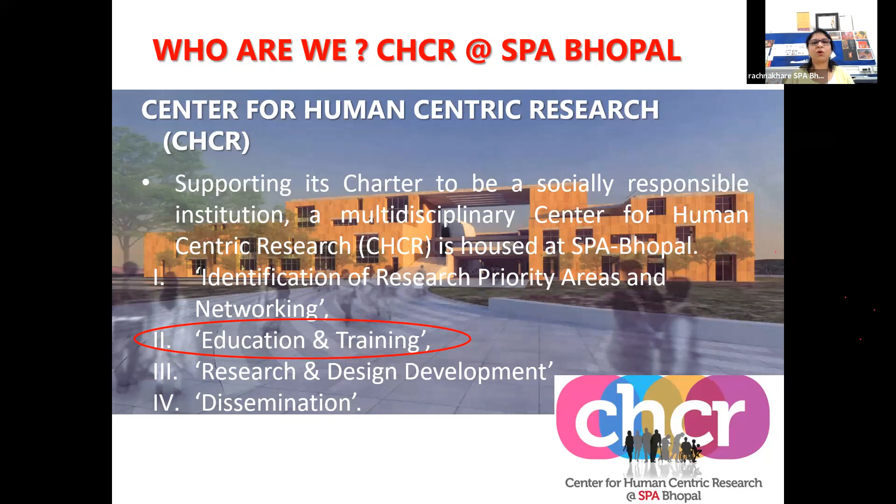Earlier, like most architectural schools, universal design was not part of regular postgraduate and undergraduate programs at SPA. We had subjects like environmental psychology, inclusive design, man-environment studies, sociology, but mostly these subjects were taught as theory courses. With syllabus revision, we could connect all these things to our main studios, and we struggled within the existing system before adopting universal design into our studios.

Initially we attempted short-term courses and student design competitions. These were some of the programs we organized, and we tried to include all kinds of good design concepts which academia was trying to include in practice and into our curriculums. So we had these short-term courses, workshops, and regular studios, and these short-term courses were acceptable. But how we did with the long-term and full studios, that I'm going to share one by one.

I have divided my examples into 3 categories. One is national student design competitions and workshops, which we did as short-term parallel programs together with our regular curriculum, BArch and master's curriculum. We have 2 undergrad programs in architecture and planning, and 7 master's programs other than PhD. We did these short-term courses in the beginning, then some integral studios which are also short-term courses, and I'm going to share some examples of regular semester studios.

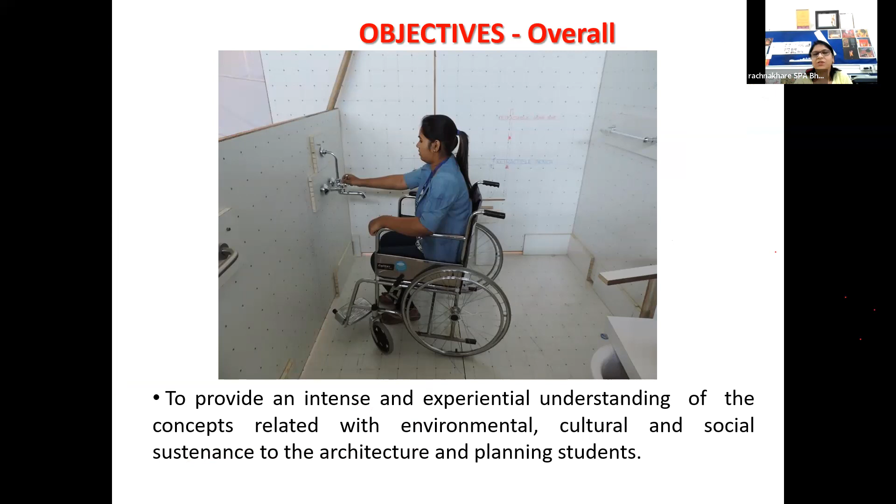The third objective was to network with various organizations and experts working in the area of social sustenance. The competitions had a pure academic purpose, and lessons learned were shared amongst all stakeholders through publications of books and articles, and public exhibitions, including traveling exhibitions which we took to different places, from IITs to NITs to NID.

This was a larger objective, but within the charter, we also had universal design. So we did 3 NSDCs on universal design, keeping that as the central theme.

We invited architects, planners, and design professionals to take part in those, and we did several activities when this was happening. It was like a festival, and everybody was here for 5 days.

We also had a brief which was floated to students across the entire country. Those who were interested in the concept could take part - it was optional even for our own students. So everybody who liked the brief and the challenge gave their entries - they first gave consent and then submitted.

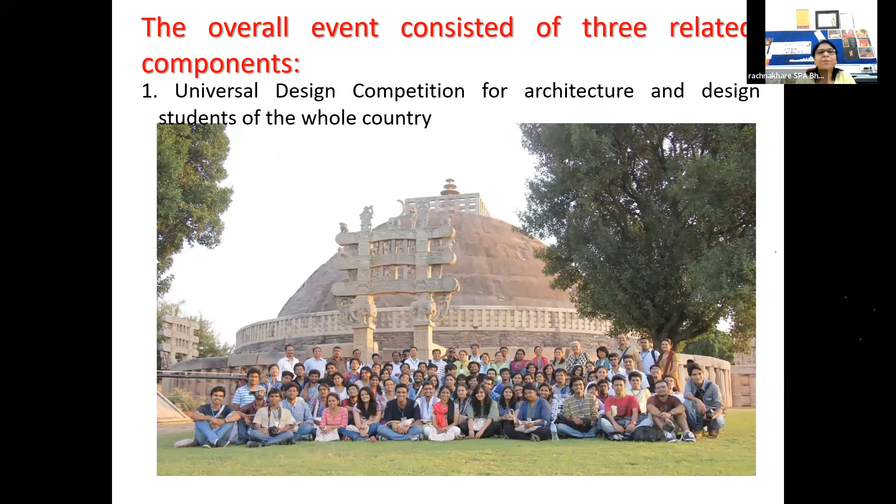You can see some examples here - we also had user experts. People with disabilities now globally are called user experts, so we engaged user experts. There's a tagline people with disabilities use: nothing about us without us. So when you are doing something for them, you're saying this is good for you.

You are dictating that they use a design in a specific way which you have designed, which you thought is right for them. But when you include them, you get to understand and gain many more novel ideas. So it's like co-design, a collaborative design, where you involve the user at different levels.

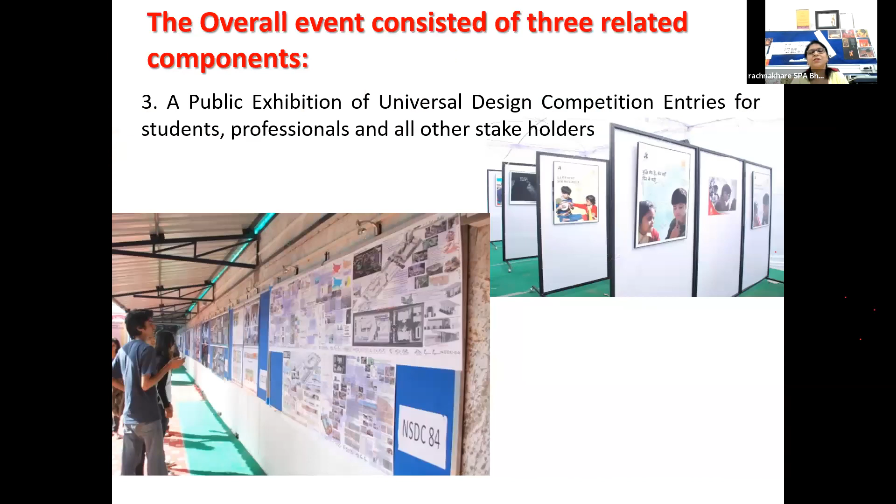So this was the competition - this is an exhibition where we also had people from different disciplines coming in.

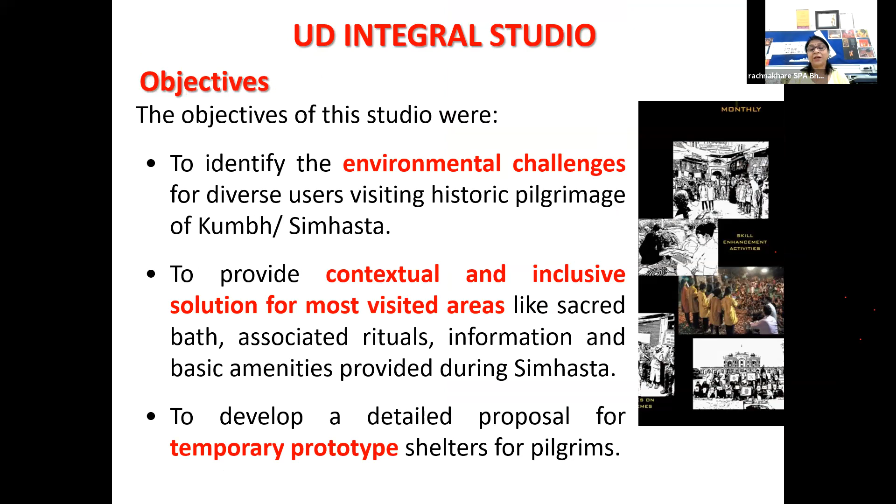Here we took the example of Kumbh Mela. In the Integral Studios we had about 350 to 450 students, across all vertical semesters and all horizontal disciplines. We took Kumbh as one of the examples and started exploring all the environmental challenges, contextual and inclusive solutions for the most visited areas, and different prototype shelters that people design for pilgrims.

It was a big challenge to design for such a diverse context. Kumbh was happening in Ujjain at that time, so we took the opportunity of that.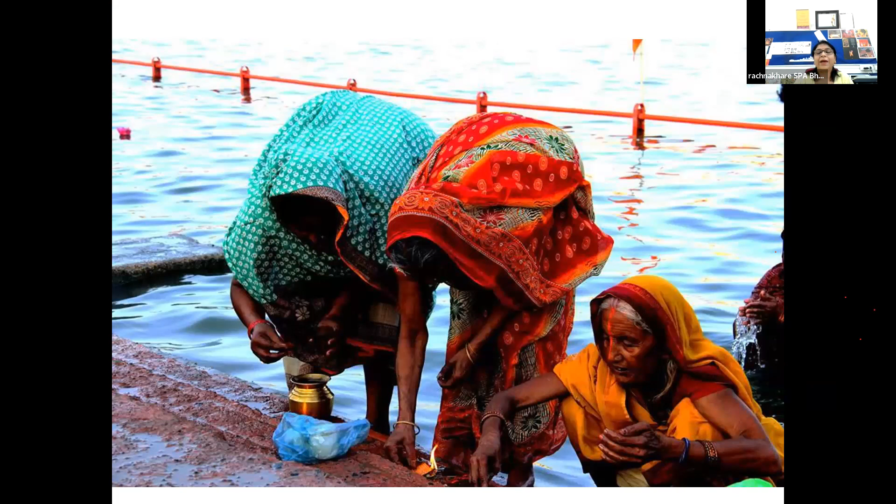When you say Kumbh, it's not just the ghat, it's also the practice and cultural context, where you have the snan, such diverse people and crowds, and several other challenges together with universal design. Yet everybody sees people with disabilities coming despite their disabilities for years together, with the help of assistance. So how do you really see this entire concept? Do you see it as accessible guidelines, or do you need your own set of innovations to help people get included in such things?

So we gave a brief: this is the site, you are supposed to design temporary infrastructure for people with disabilities. It was like a regular brief to everyone, where they were supposed to make prototype shelters.

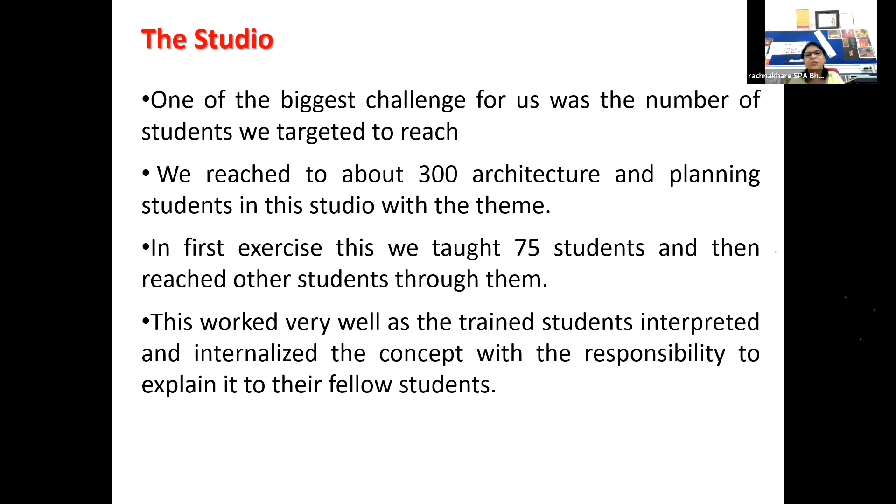I'm going through this quickly. We took all the students to Ujjain. The number was a big challenge for us, so first, how to reach out to such a large number of people and students. We initially trained a smaller group, and then reached out to the larger group through them, to help them internalize the concept.

When you're teaching it through the students, you have certain mentors, and those mentors reach out to the larger group to help. So we had people who went, who saw, who explored, who spoke with people from all different kinds of vulnerable groups, those who never had a voice in the design and planning process.

We said that all of them should be included. We had theologians, pujaris, environmentalists, police officials, who talked about how they really manage such numbers of people. We also had people with disabilities, as user experts, who came as part of the studio, and then the students attempted the design exercise.

I'm going to share some examples of the exhibitions, which we did as public exhibitions. We realized that when we do Integral Studio and explore the universal design concept with different disciplines together, we are thinking about the problem and not about the disciplines. We are not thinking in silos, but looking for an open-minded, open-hearted solution to the problem.

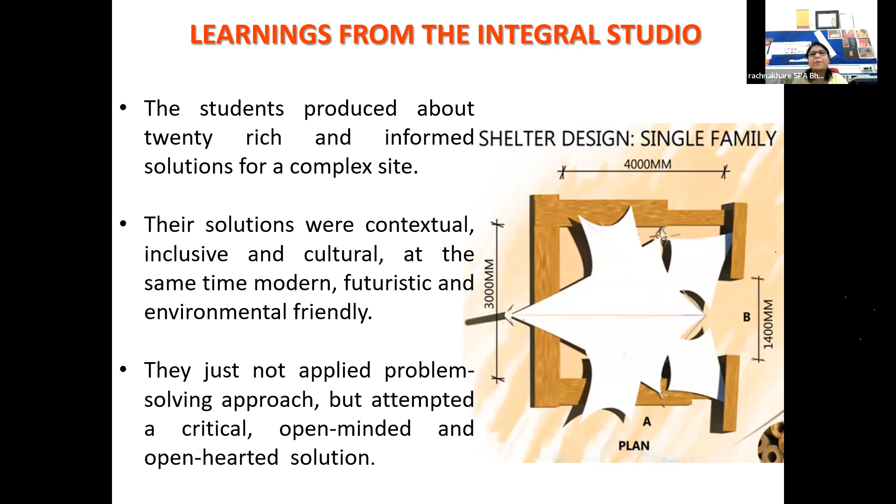Their designs were cultural, because we were talking about a culture so Indian in its context, but these were also all modern students, so they made futuristic and environmentally friendly designs. Inputs from humanities and liberal arts resulted in enriched design thinking.

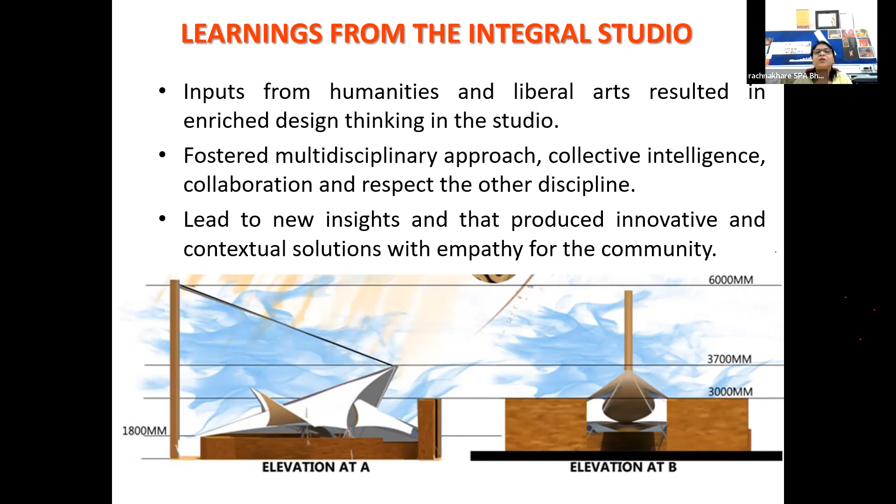So this brought a new insight, and then we could do innovative contextual solutions. So I will go to the third one, regular semester studio. After doing this, we still were exploring whether we could really do it as part of our regular design studio.

Then came Berkeley Prize to SPA Bhopal. There was a teaching fellowship being launched, and then we could do it as part of our regular design exercise. This was a global studio where we had parallel studios happening across the entire globe, and everybody was working on the universal design concept. So the idea was to identify environmental challenges in the Indian context, identify opportunities for universal design, and create universal enabling designs. So we did some regular exercises in the studio.

Again, we took Ujjain because Ujjain is near. And when we were talking about universal design, our definition was based on diversity. So the places which are more diverse have more opportunity to become inclusive. That is how we started doing it.

We had several questions in our mind: can it really be taken as part of our BArch program as a full semester course? Gradually we could do it as a full semester course. We also thought about how we would examine universal design in the whole process, and how it would be taken by our co-faculty members, students, and education managers—as a concept that is like a separate sheet from accessibility and universal design. And in case it is part of universal design, how will we measure it, and how will it appear? It will be seen on the national map of architecture education.

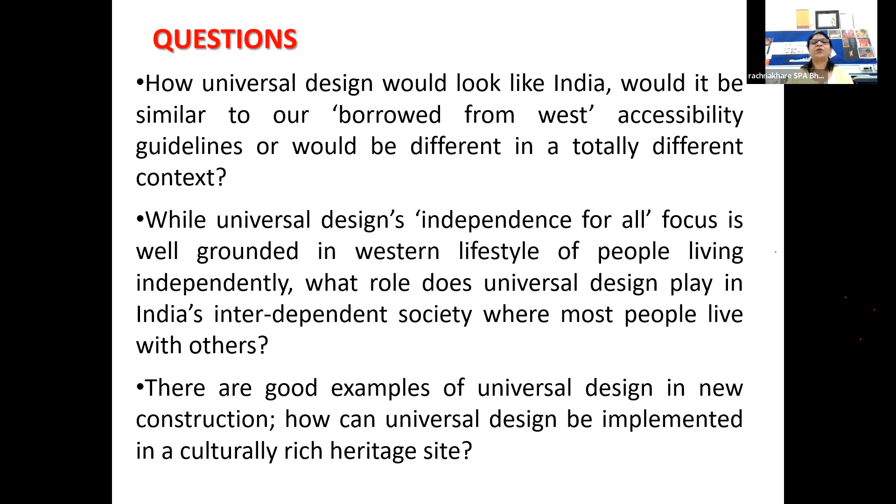We also thought about how it would look in India, where you have people coming to Ujjain with this big thing of assistance, and we are talking about interdependence in the Indian context. So how are our examples going to look, and how are we going to teach it in the regular studio? So then we thought, okay, let's do it as a universal human-centric approach.

So we had this studio. It was universal design for cultural interface, where one part was universal Ujjain and pilgrimage, and another was universal design context—knowing more diverse users in the Indian context, and then applying a universal human-centered approach.

And then we said, okay, identify different kinds of users by purpose, age, ability, religion. There may be some whom we know because we are talking about people with disabilities, but then you also have people who are not so educated, people coming from rural backgrounds, people from different classes, those who have linguistic disabilities. There are different kinds, so try to know as much as you can.

And then we told them how, in the design process, these users fit into your different design stages—user as a subject, user as a partner, user as someone giving you feedback. We call this the user-centered approach in design. We also taught different research methods to study user as a subject and user as a partner, and then told them how to summarize this entire thing.

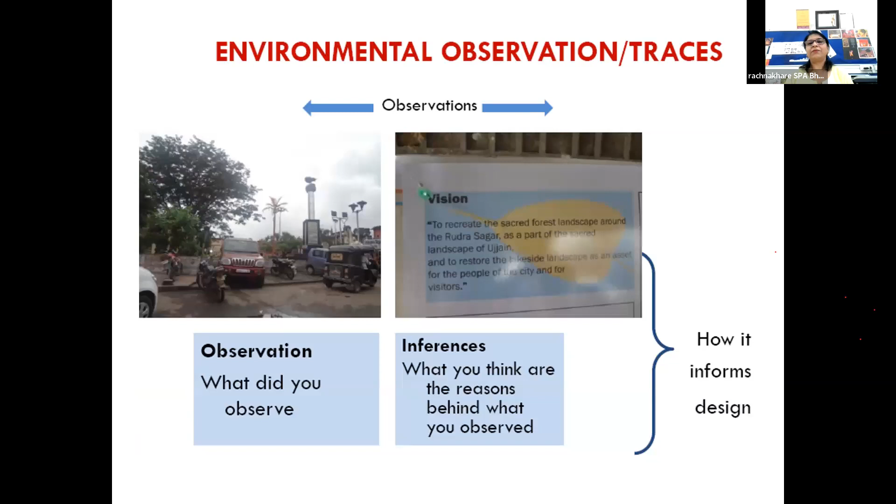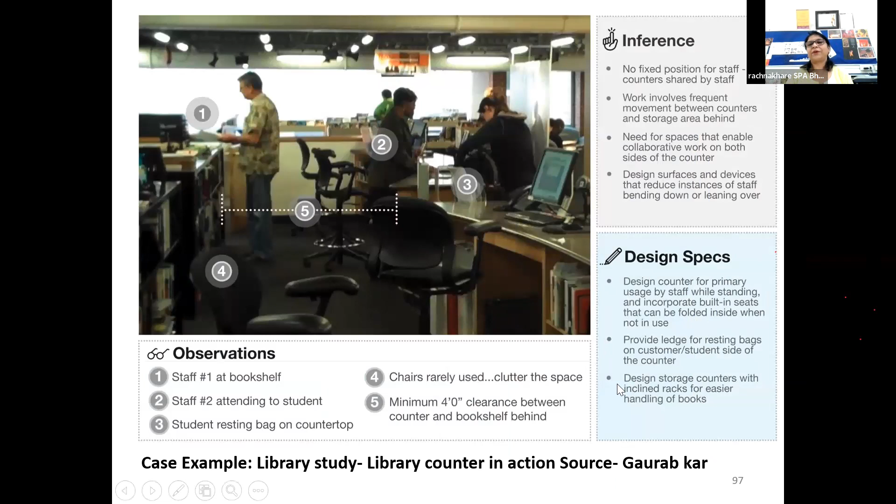And then we started with simulation games. We told them about environment behavior studies, research methods, how to summarize it, and how to put it together. Qualitative data in such contexts is really overwhelming, so we told them how to connect it with design, and how to organize this entire information and bring it to design specifications which inform design—so that at the end of the day you are able to convince others that yes, you have done it in a specific way. So there are design specifications which inform design.

So after doing all your interviews and observations in an organized way, you bring your qualitative data to design. These are some of the methods and procedures we used, and we brought the inferences and design specifications in the end. We thought these are some of the methods and tools that can become part of practice in the Indian context.

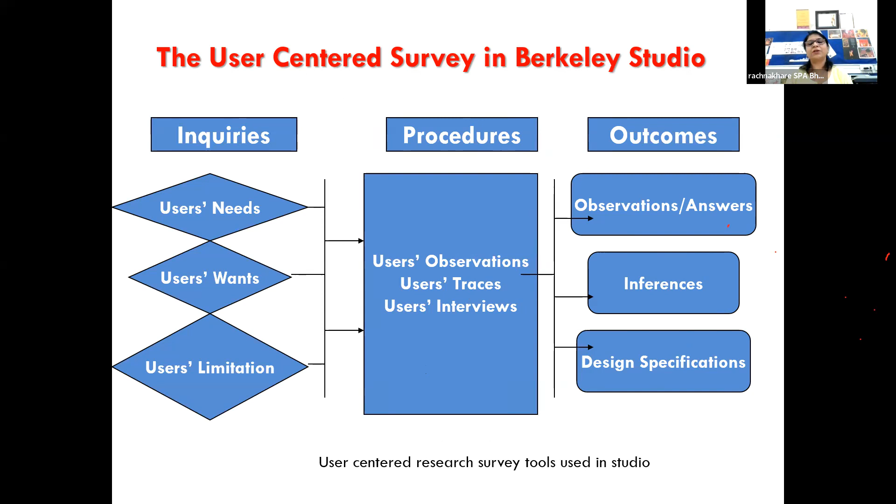We also trained them in ethical considerations, and then we had several people going to Ujjain again. The Ujjain context is really very chaotic, but it was a challenge. Initially we were all disheartened—what we have taken on, will it be possible for us to do it? But then it was part of the Berkeley studio, so we had to do it. Gradually, all these things came down to design specifications. All these interviews—people had their own ways to do user studies.

And then finally, we could do this entire journey. Initially, we did not know where to start with, but then everybody was getting attracted towards those well-compiled codes. But gradually, we realized that by the strength of user-centric design, our research methods, and pre-designed user data connected with design solutions, we were making a lot of innovations and enhancing our students about inclusivity and inclusion.

And now people made a lot of out-of-box solutions. They showed a lot of empathy, maturity. They went out of their work area. They even made designs which were more than what they thought were included in or needed for the evaluation. So this is how we did it, and we had the best design studio in the entire semester. Now we do it almost every time.

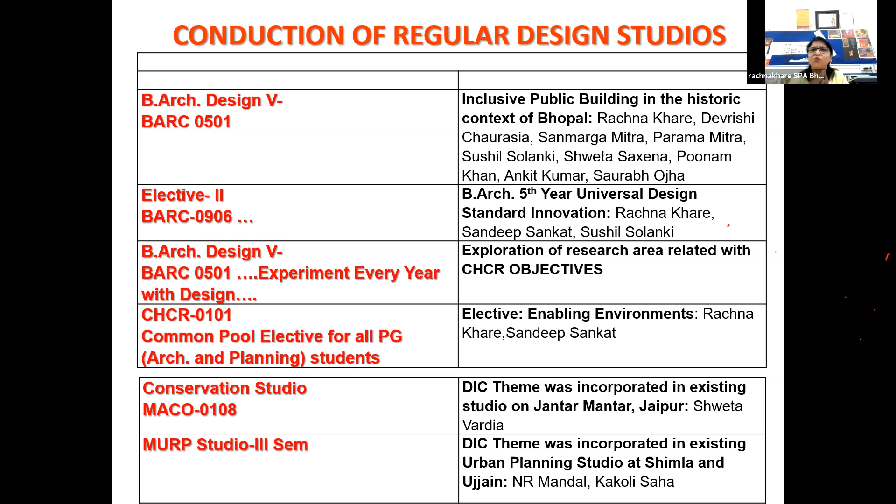We do it in urban design, we do it as part of conservation, we do it as part of planning, we do it as electives for undergrad and postgrad, from different kinds of cognitive disabilities to all different kinds of buildings like Paralympic stadiums and others. Now we are able to do it without any problem as part of our regular architecture education, and it fits so well in the entire curriculum. That was a learning for us.

So how did we evaluate it? I'll finish with my evaluation. I won't go to the examples because we don't have time. So how do we evaluate it, in short-term courses, long-term courses, or in Integral Studio? We always had, to make it part of our regular semester studio, two criteria to judge: one is universal design criteria, and another is physical design criteria.

Physical design criteria was your response to the given studio brief and its context, which we do anyway. Research into the needs of the people and community to understand the key challenges. So we diverted them from standards to the people, where they were able to, and we gave them methods. We empowered them with research to do this.

And then we said, how original and creative you were to this brief, and created innovative solutions. And the fourth criteria was that it communicates the key idea of universal usability, retaining the authenticity and integrity of the site in function, spirit, and aesthetics.

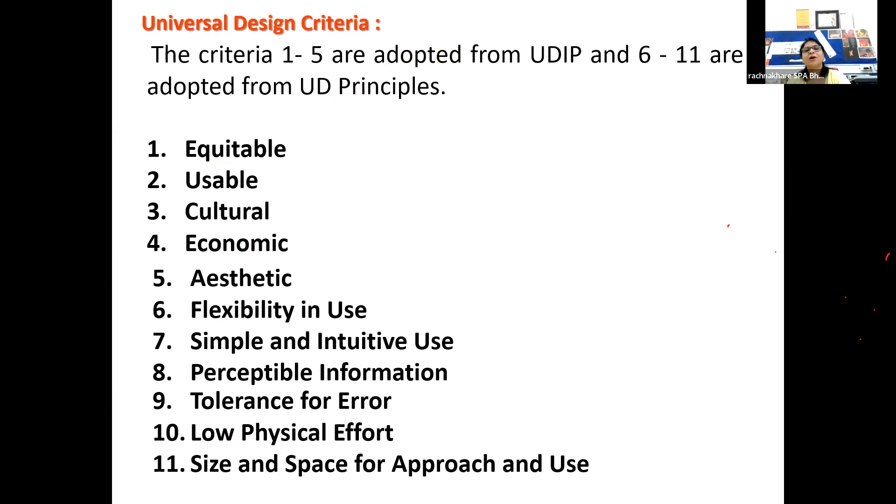Whereas universal design criteria was adopted from universal design principles and universal design India principles: how equitable, usable, cultural, economic, aesthetic, flexible, simple, intuitive, perceptible, error tolerant, and low physical effort. So all these principles were translated into evaluation criteria, these 11 criteria, and every time we judged using these 11 criteria. Whether it was short term or long term, we could do it with the help of these evaluation criteria.

And we have come a long way, right from those products to those environments to buildings to interiors to design. We have also developed some multidisciplinary projects. And I would suggest all of you, in case you consider ways to improve your curriculum, consider including universal design. It is quite rewarding. So thank you so much.

I think I'm on time, Prashanti? Yeah, you are in time, ma'am. Thank you. Thank you so much.

I have given all these examples in my handout, so in case somebody is interested, they can see some of these examples, which we have done at urban scale, at city scale using GIS, and at product scale, in small products also, in different ways.

Thank you. So any questions, anything? Yeah, questions are invited.

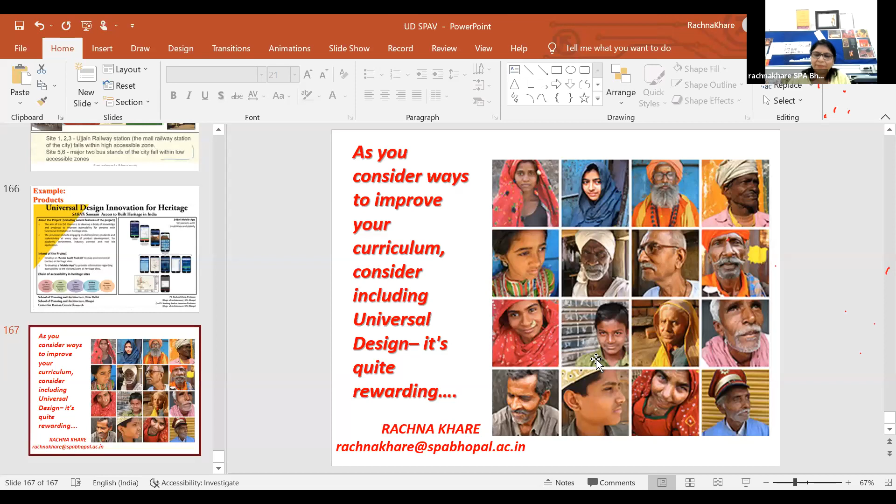Hello. It's Prashant, sir. Yes, ma'am. Do you feel one sort of disability might conflict with the disability of another kind? For example, if I'm trying to see tactile marking along the streets, when the streets are already too narrow, it becomes a problem for other kinds of people who have locomotor disabilities and all. Okay. Yeah, there are many such instances where you have conflicting issues, right?

But first, the step is to do the baseline design. So in case you are talking about narrow streets, you have certain standards, certain numbers of the traffic and the people whom you are supposed to serve. Then you also have the issues, in case you are talking about the people, you'll realize that you have hawkers, people who have encroached upon these streets. So all these issues, and then you also have different other users.

So when you are making the first layer of baseline issues, then another layer of issues which are conflicting the baseline arises. Then some people have requirements which need to be met to make it inclusive. Then, step by step, you include everyone.

So to this, I would say, who says you have to have those yellow tiles? Who says you have to have a certain width of those yellow tiles? Why is it meant for? How do people with vision impairment use these tactile tiles? Is there any other way we can do it in a subtle or narrow way?